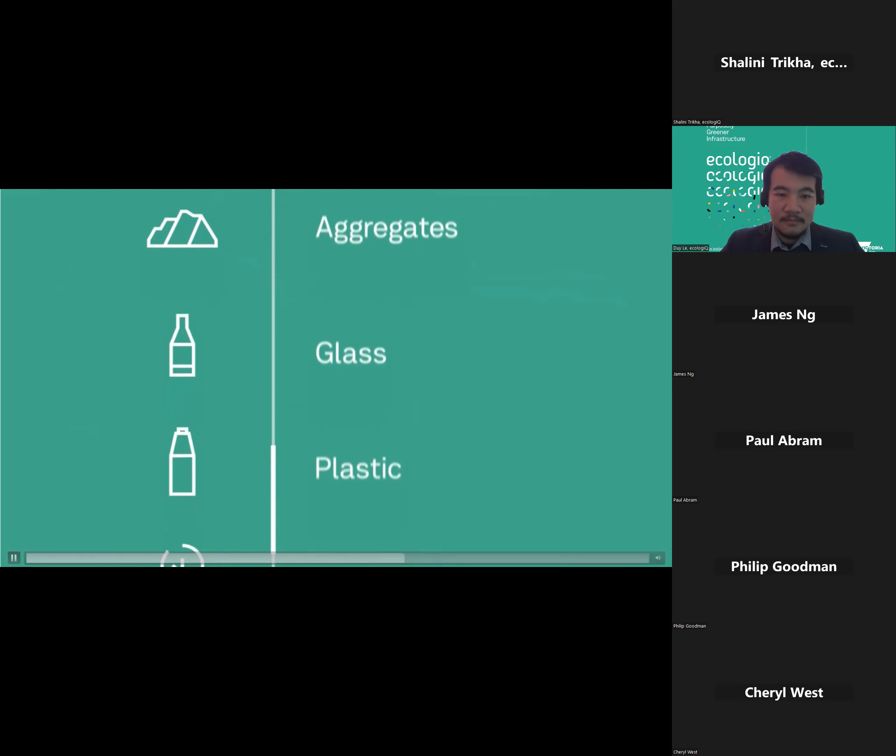The Recycled First policy. Recycled First will require transport infrastructure projects to optimise the use of Victorian recycled and reused materials. This will see the use of recycled aggregates, glass, plastic, timber, steel, ballast, crushed brick, crumb rubber and reclaimed asphalt pavement take precedence over virgin materials.

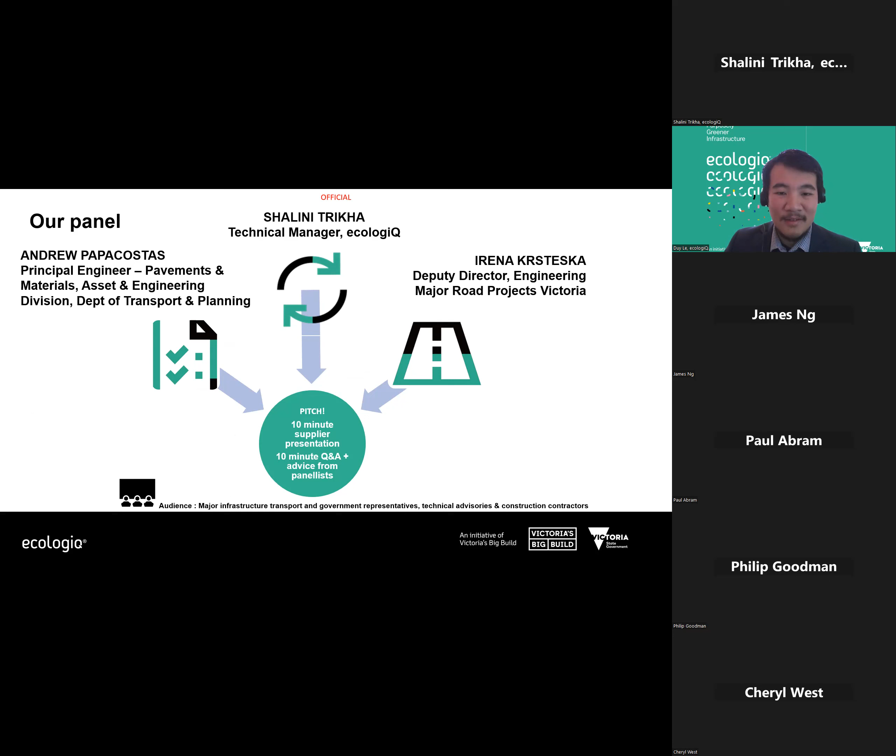Perhaps I'll kick off with Andrew Papacostas, Department of Transport Planning. Andrew: Thanks, Di. Good morning, everyone. So I'm Andrew Papacostas, Principal Engineer, Pavements and Materials. One of those areas that I deal with is specification and standards, and that also takes in new materials, innovative materials, and therefore also takes in recycled materials. Thanks, Di.

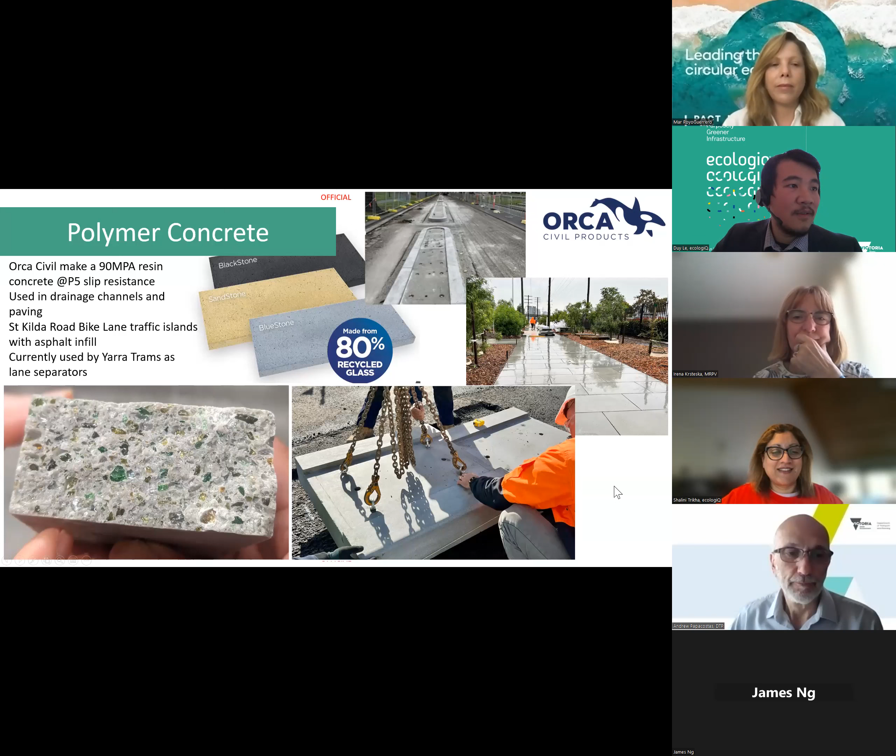Now, just to fly through some of the people who've gone before in the showcase event - we've been running these for about 2 years. Here in Victoria, we've got businesses like Orca Civil that make a wonderful material, a polymer concrete made with recycled glass and calcium carbonate. It's been used by Yarra Trams in the city of Melbourne for a number of years, and you'll be seeing it on the St Kilda Road project. Great local innovation - it can look like bluestone or other materials if you need it to.

So if you're looking for paving or alternatives to concrete, there's one to consider. There's businesses like Omnigrip that use coloured glass and other materials to provide safety treatments for surfacing and asphalt. You can see them used on bus lanes. But thinking creatively, for any architects and designers out there, you can leverage this material to activate public spaces. And yes, it does meet the DTP specs under Section 431.

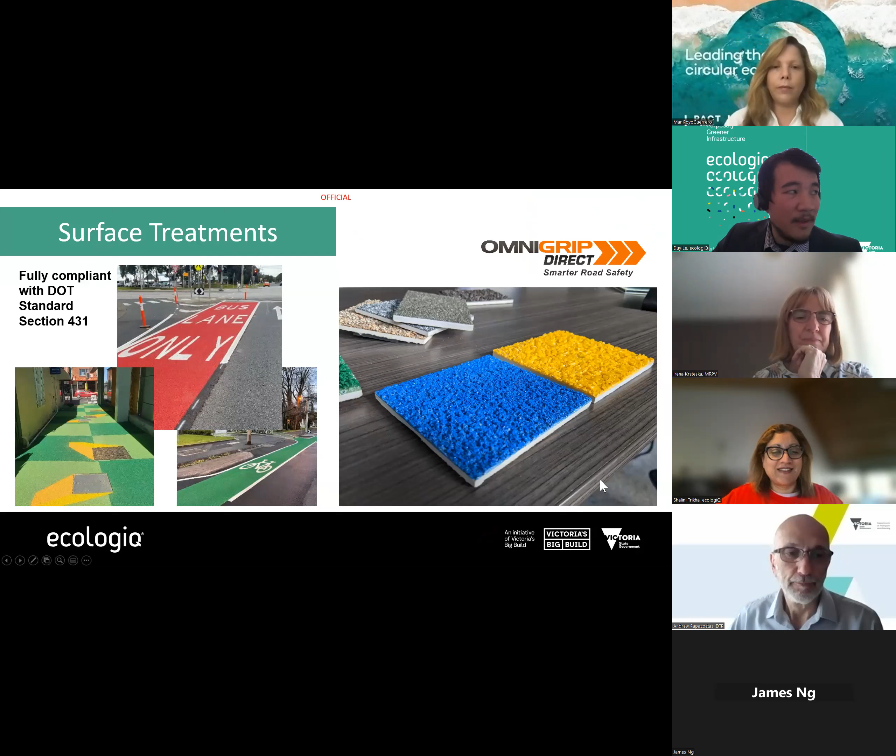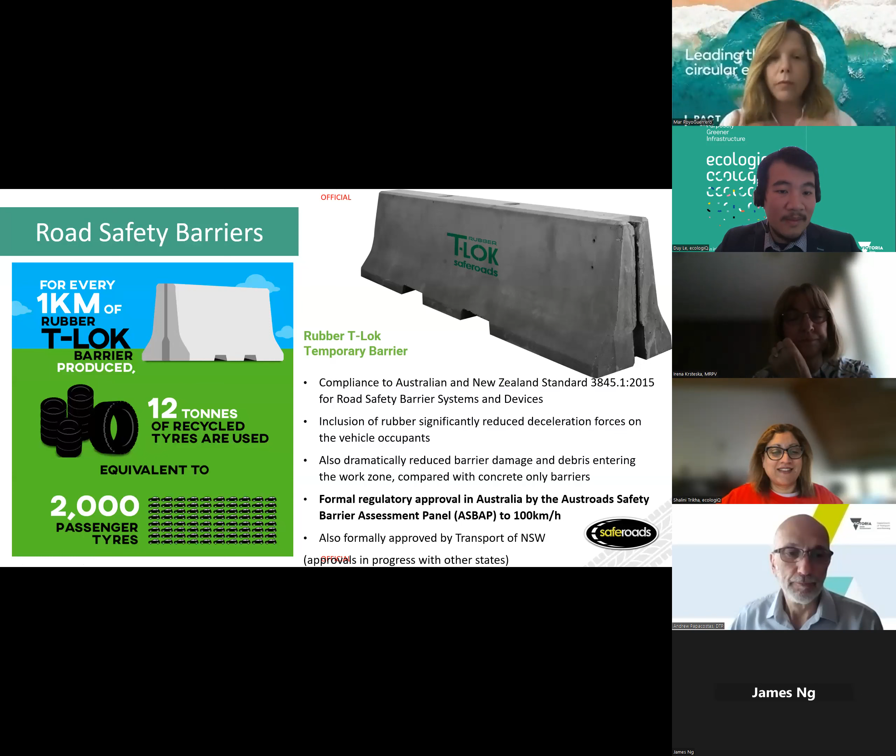More recently, we have Saferoads, which has developed Australia's first T-Lok safety barrier for high-speed safety barricades. These have 4% crumb rubber added, which actually improves the safety performance of the barricades. These are now approved by not just New South Wales, but by DTP VicRoads as well. So this is one that's available to market that's come through recently.

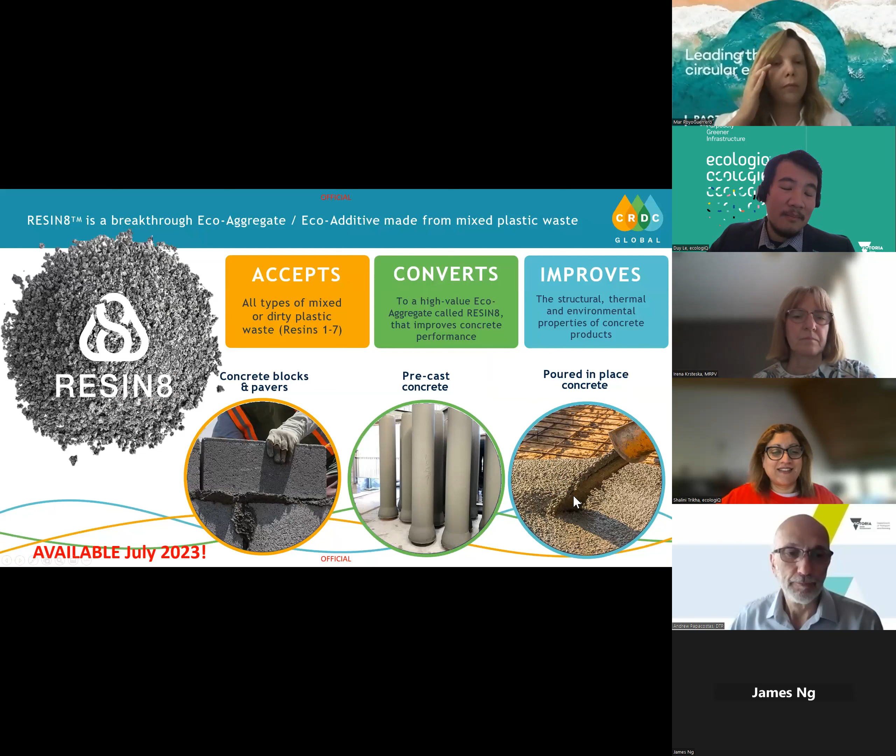And we have businesses like CRDC that, in light of the recent soft plastics issue, have set up collection loops and a processing centre in West Melbourne to take soft plastics and convert them into a plastic aggregate they call RESIN8, which can be used in construction.

Businesses like Casafico, which work more in the built environment, take polystyrene, glass, and other wastes and convert them into building blocks, leveling coats, and brick and mortar material. It's been used in quite a number of high-profile retail and sports stadiums.

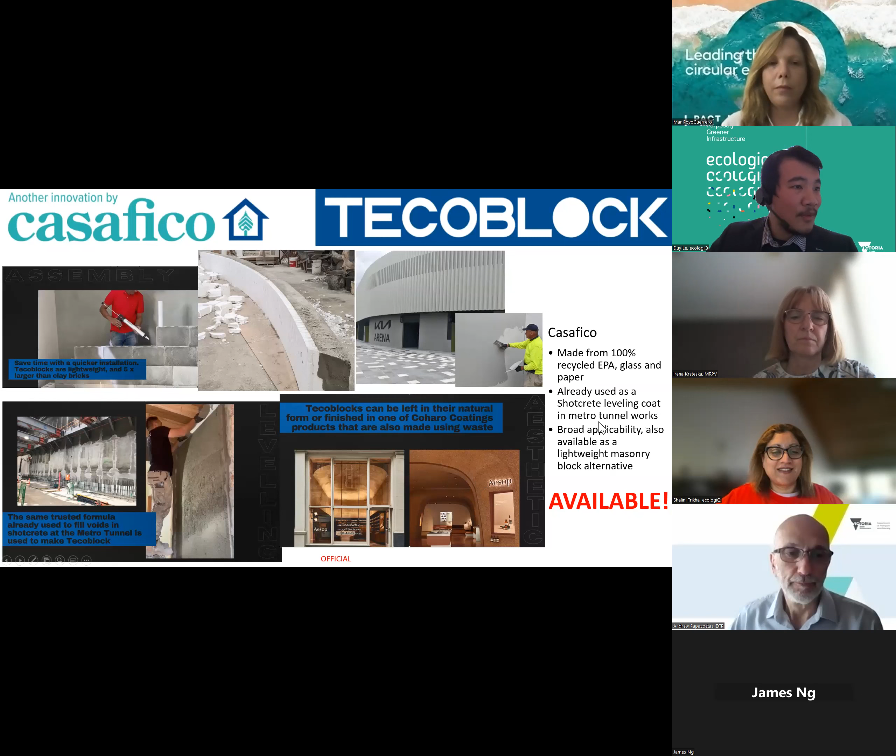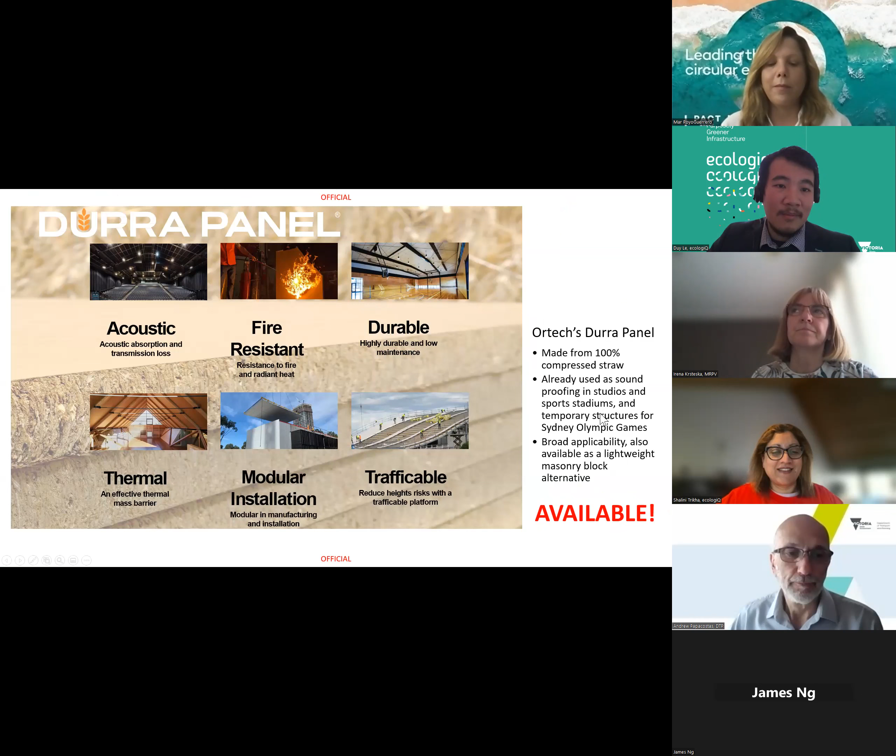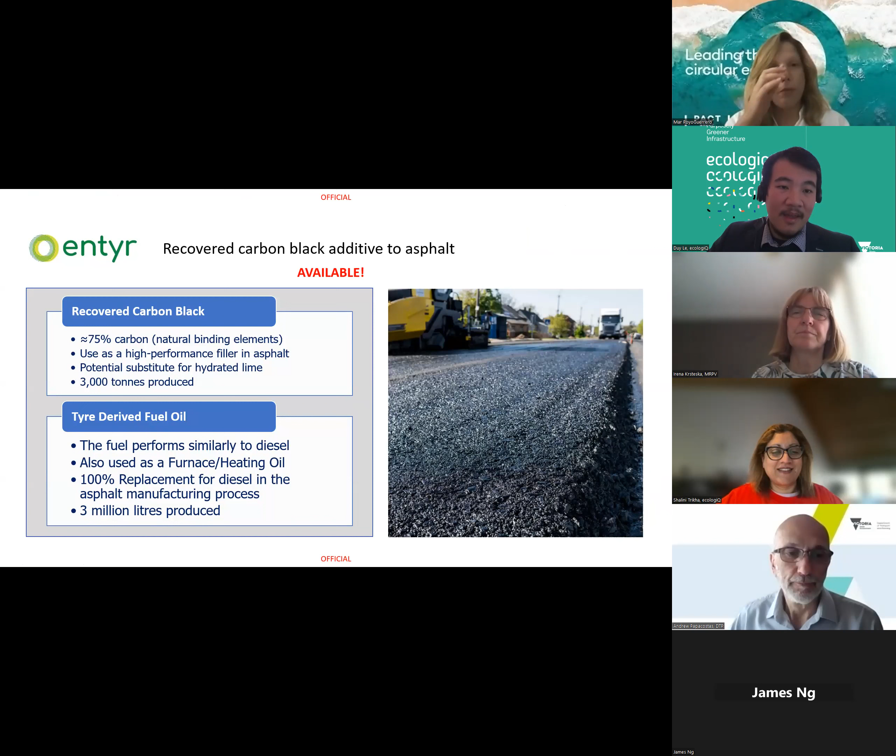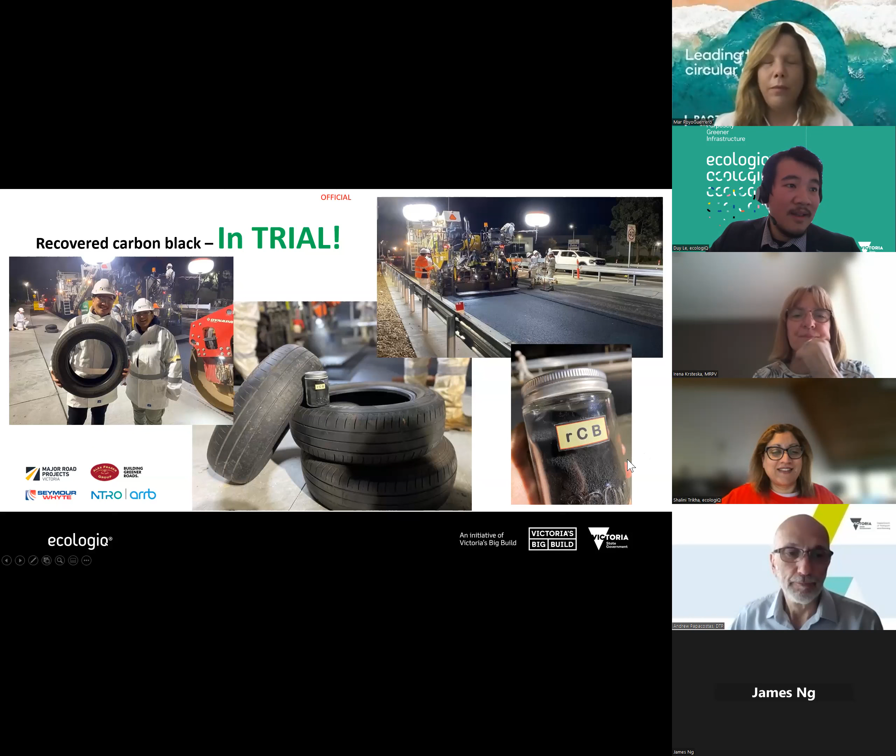More recently, we had a business that takes recovered carbon black from end-of-life passenger tires as a fill material in asphalt, and they pitched at the showcase last November. Earlier in April, myself and the team, through collaboration with everyone here at MRPV, our industry partners and DTP, were really happy to see that go into the ground as part of a demonstration trial, and we'll be tracking the performance of that. So again, the idea behind this showcase is to see more examples like this.

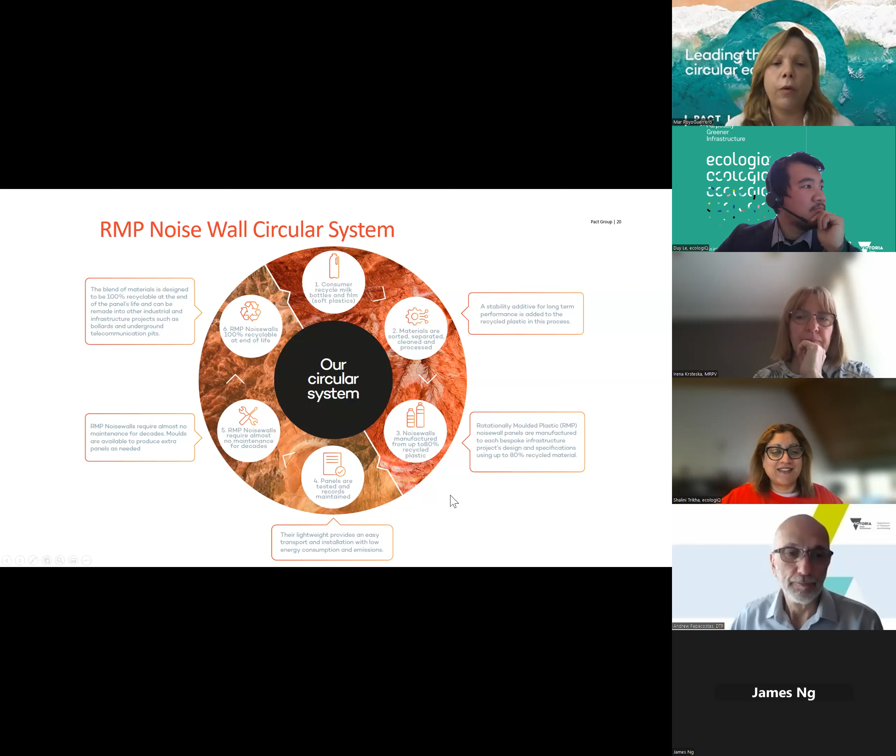The reason we're trying to be consistent in that area is we're trying to make a product that will not only have one more life cycle, but even if it gets damaged by an accident or after decades and needs to be replaced, it can be reground and turned into other products like underground pits and other products we manufacture. Being plastic, we can talk about a lot of different design possibilities.

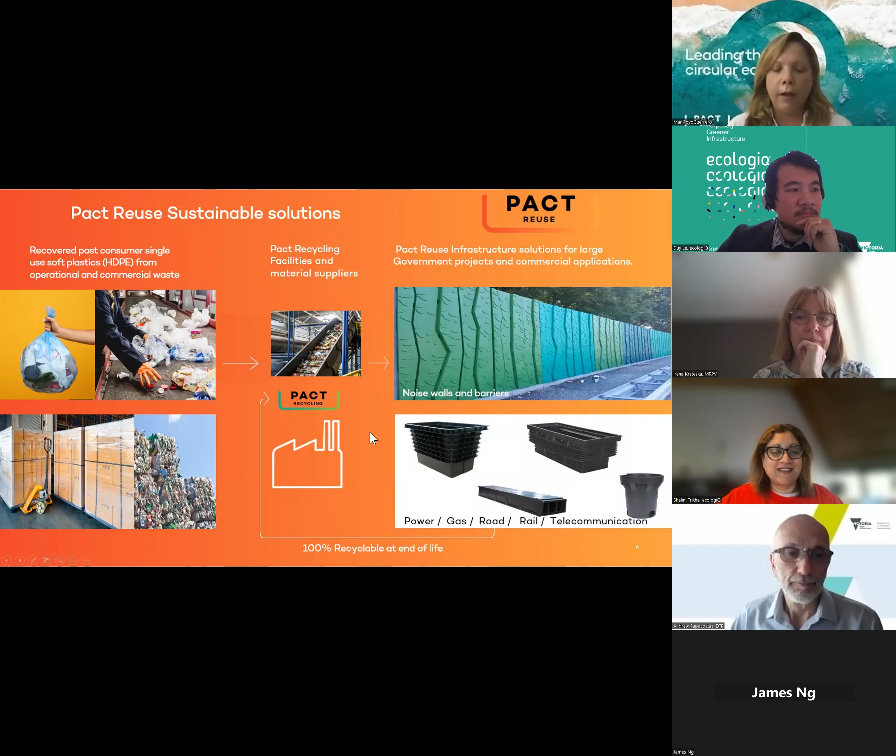If we can move forward, Duy. So this is what I was trying to explain earlier. On the left you'd see things like soft plastics, stretch wrap that we use widely in industry. For example, our returnable crate service, DPS - a lot of these products with food grade contact regulations require stretch wrap. It's very present and really hard to recycle, so we were really satisfied to be able to incorporate it in our blend. The end result is what you see on the right side - your noise panels, to different degrees of post-consumer and post-industrial material. We also make other products like gas, electricity, telecommunication underground pits.

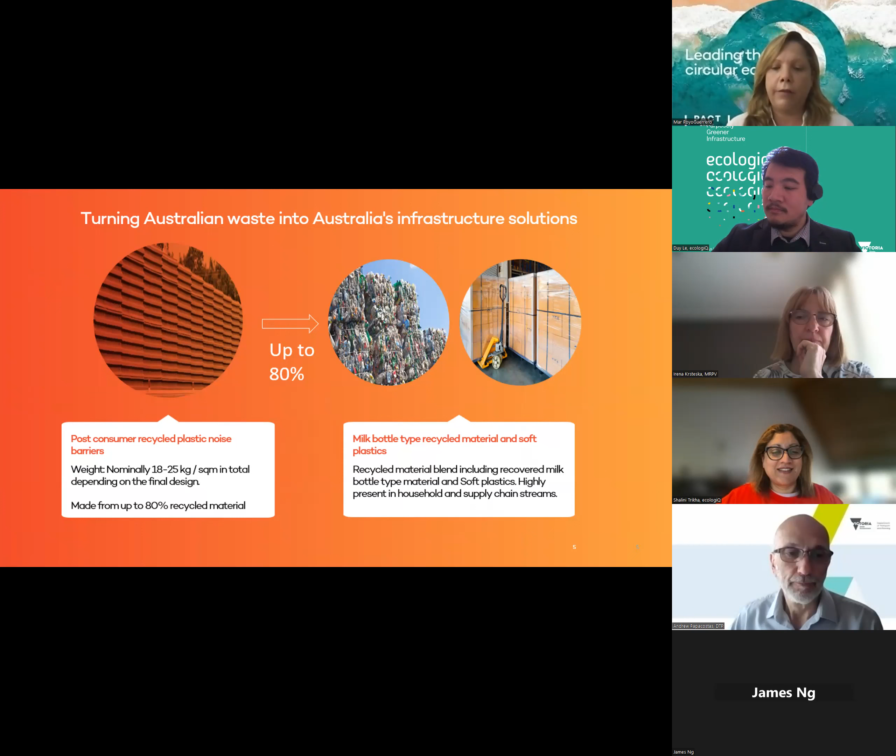Can we move forward. Our best known, as I said, is the Mordialloc Freeway project. This is a very lightweight product, about 18 to 25 kilos per square meter, which makes it really easy to handle and transport, very quick to install, very safe, and also very durable.

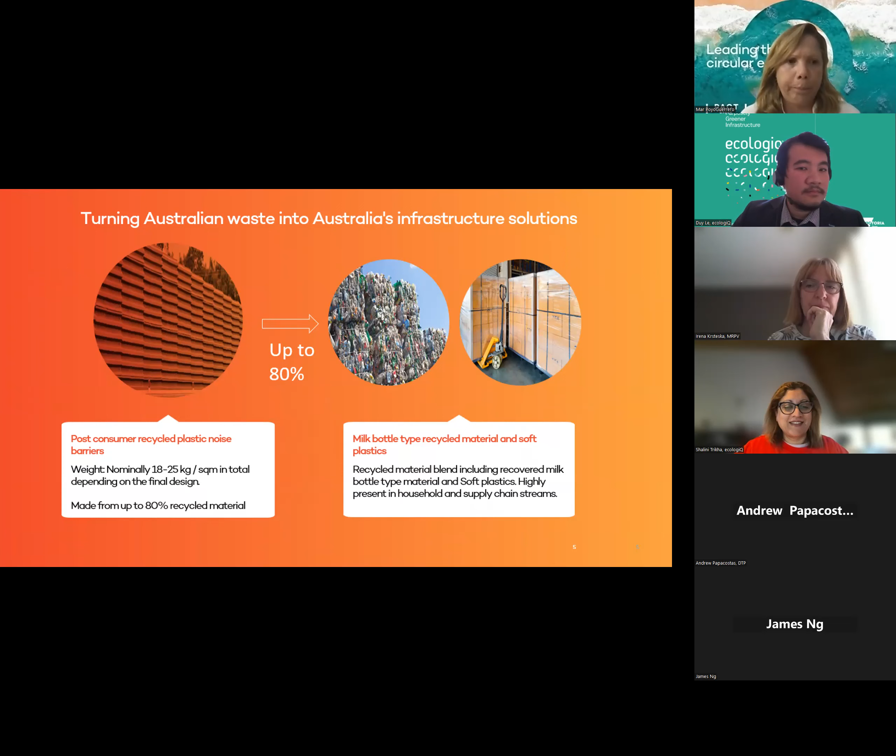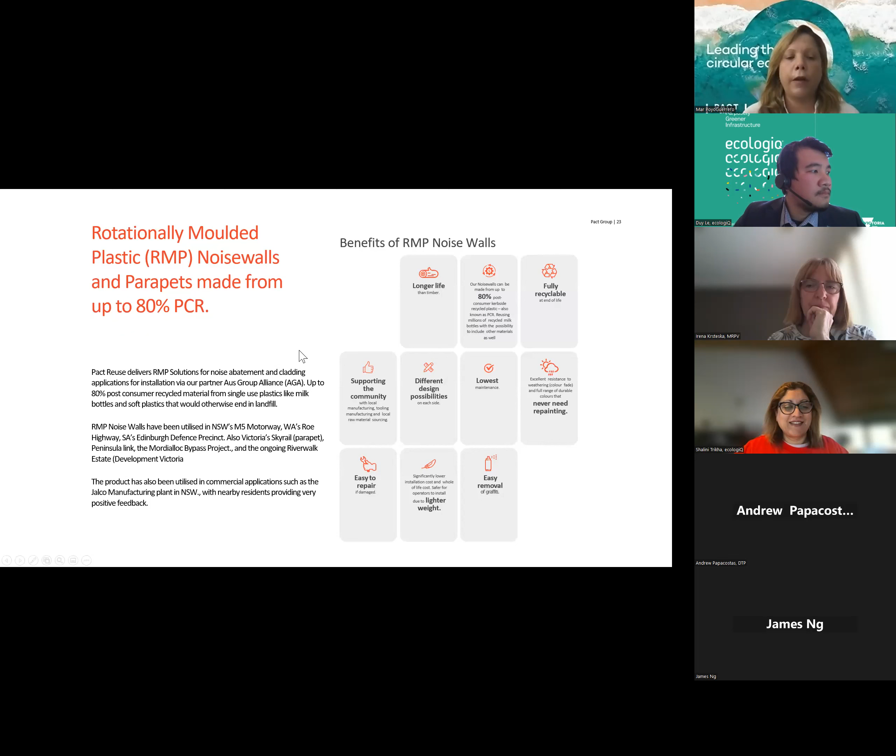We are moving forward in this space, as this is a product with great possibilities, so we can expand the design intent, even the application.

Many projects you'll see, in this case, both designs at the top are the same panel, front and back, so the panels can have a different design on both ends. As you can see at the bottom, we can cover fixings and show them to different authorities, since different project managers want different things. Some people want a smooth design, some people want to inspect the panels and their fixings. We can also imitate other products. That one at the bottom right, I actually didn't know it wasn't concrete until I started working for Pact. That's just color matching and laser printing to reproduce a panel made in concrete that was already in that area, and we just replaced the section with our product.

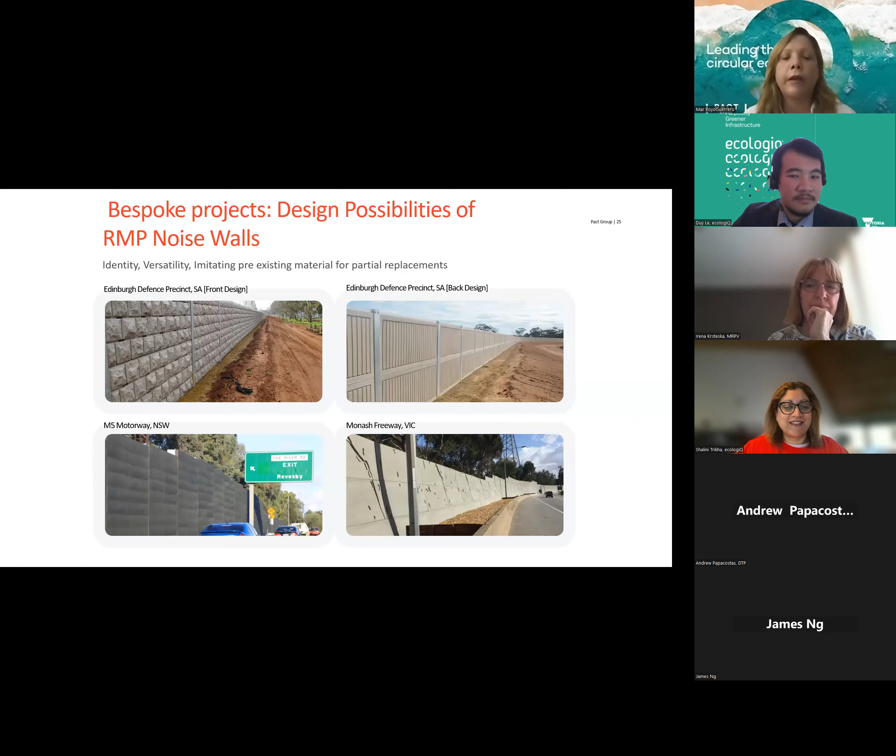A little bit further, these are examples of design possibilities. The advantage of working with molds and plastic, since this is a rotationally molded product, is that we can be very versatile and very open to design intents, imitating products.

We are working in different spaces, so we can see this product being applied to different industries and applications. We used this product in a manufacturing site belonging to the Pact Group's packaging division, which was getting complaints from neighbors because they started operating after hours. So we provided them with the product, set around the factory, and got very good feedback from the factory itself and from neighbors who appreciated that we were using a recycled product.

We want to see this product also in the likes of commercial, real estate, and other industrial applications. Actually, the Riverwalk project I just mentioned earlier is a real estate project, a housing project for Development Victoria.

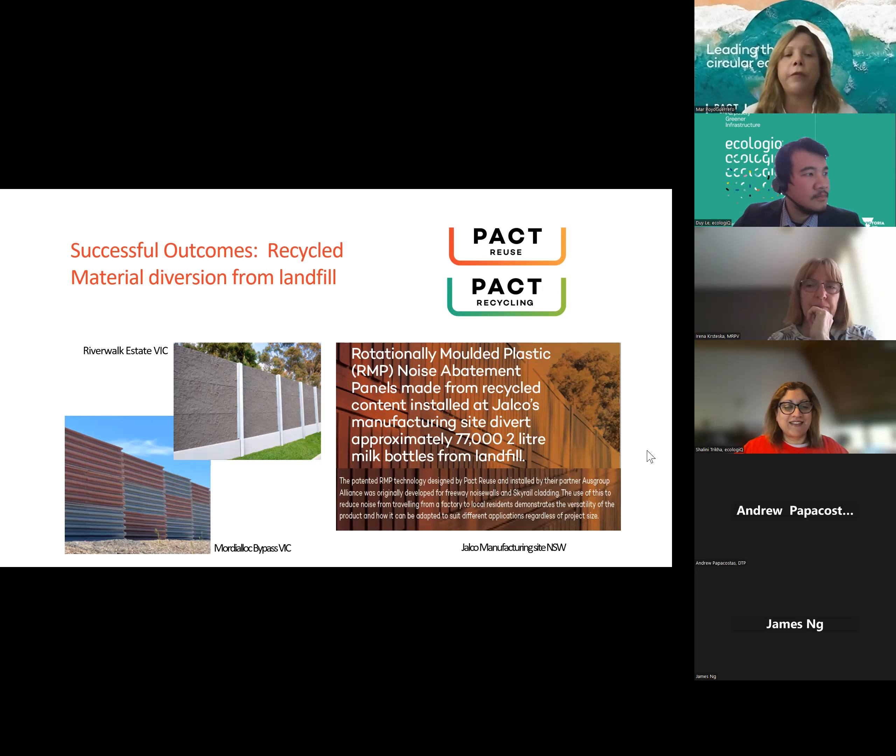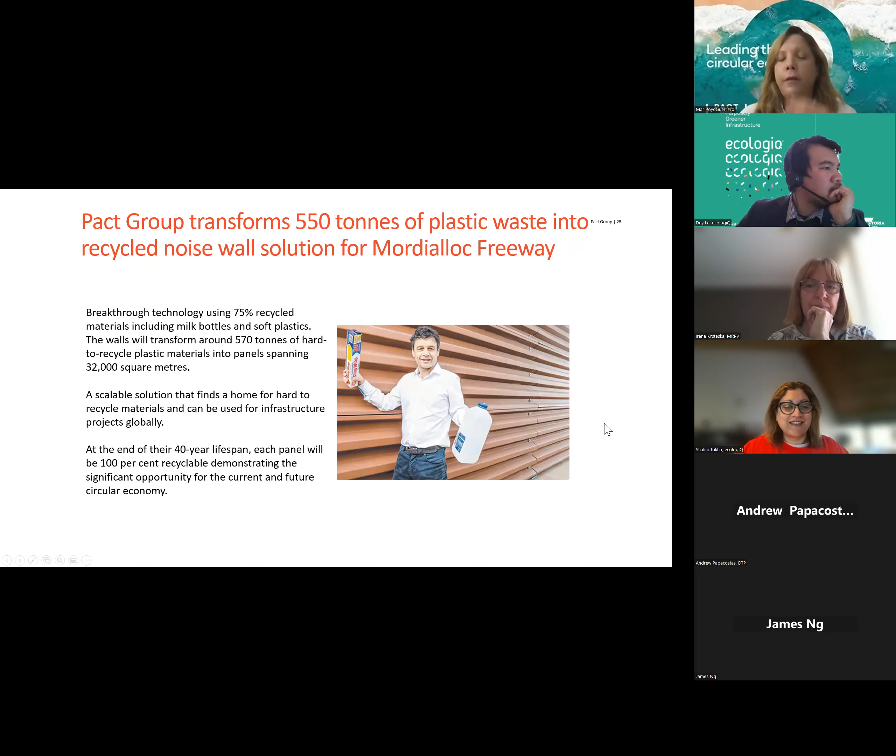This is, again, the Mordialloc project where we use up to 75% recycled material. We can do up to 80%, but in this particular design, due to adapting to the architect's intent who had already designed panels in Corten steel, we had to make them a little bit heavier for the specification. So it was around 570 tons of plastic that would have ended up in landfill, coming directly from curbside recovery—stretch wrap, as an example, the milk bottle grade—that was processed and repurposed, and it's part of the noise walls right now.

We are working with our design team on different applications that we can expand to in the future. For example, we noticed that there are projects that don't have noise walls, but everybody needs visual protection during a construction phase, like gawk screens, or even noise abating gawk screens that can sit on a jersey barrier, concrete or steel. We're working also on standalone noise barriers for crowd control. Everything we are developing would have the same formulation with up to 80% post-consumer recycled curbside recovery material.

This is not a new product by any stretch of the word. The formulation is quite recent—before we were doing 30%—but we've been manufacturing these noise walls for over 15 years and they are still standing as the first day. They are really reliable and a really good solution for a circular economy, being 100% recyclable at end of life.

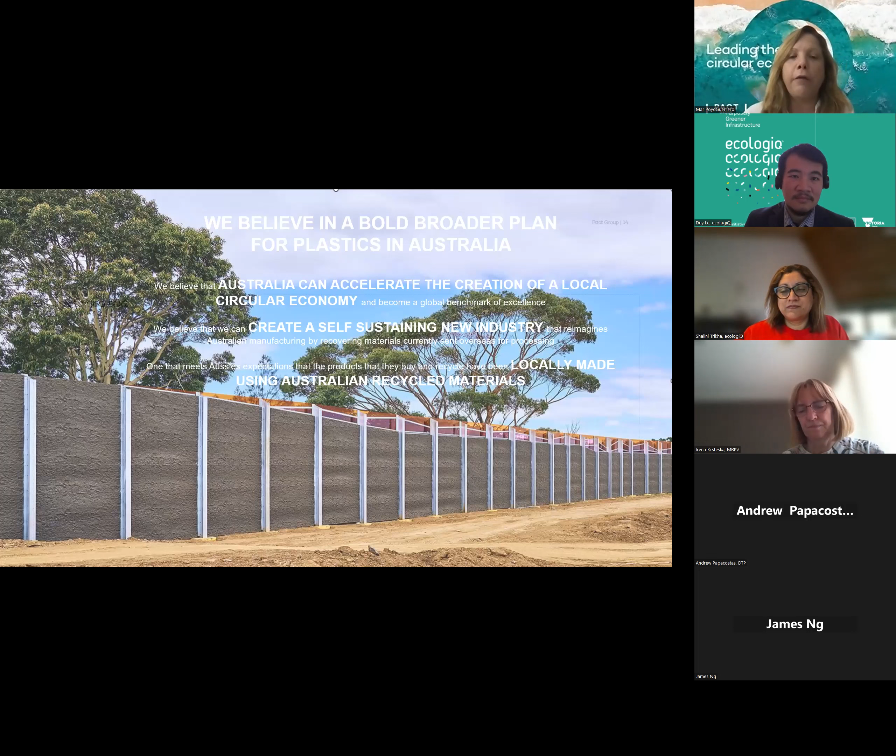We just want to see the specifications on the ground, obviously, because some people are saying we won't be moving forward until we have finalized, published specs to refer to and all that.

Well, stop comparing to concrete.

Thanks, Mar. Great presentation, and of course it's very important to mention the Mordialloc Freeway project success in implementing the noise walls. What I wanted to ask you is a couple of things. Obviously the durability and lifespan of the panels, as well as how can we be sure discoloration is not going to be an issue with this type of product. Maybe you can tell us how that performs on your product. And the second thing is, what sort of challenges did you find implementing the product on the Mordialloc Freeway that you've learned from and now improved?

Sure. Look, first on the durability and the color fastness you were asking about: the product is a rotationally molded product. The way that works is a powder plastic goes into a mold that rotates and goes into an oven, coating the mold, and then you open it and have a hollow product, which is the panel. It's the same way we manufacture water tanks, for example. So the color is in the powder. This product is not painted at all. So if you cut it or scratch it, you'll see the same color at the back and inside.

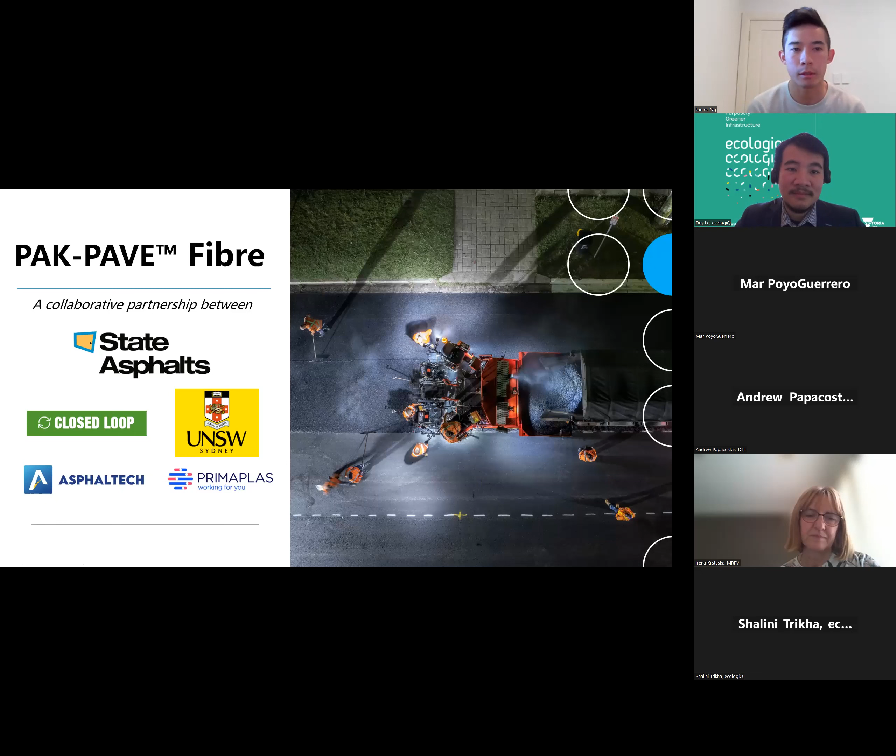I'm a project manager at State Asphalts New South Wales, and I've been looking after our sustainability projects for the past few years. Brendan and I actually presented here a couple of years ago at one of the first ecologiQ showcases, and we've come some way since then. Today I wanted to talk about our collaborative partnership to develop construction materials from waste, but more specifically about a product we brought to market called PAK-PAVE Fibre.

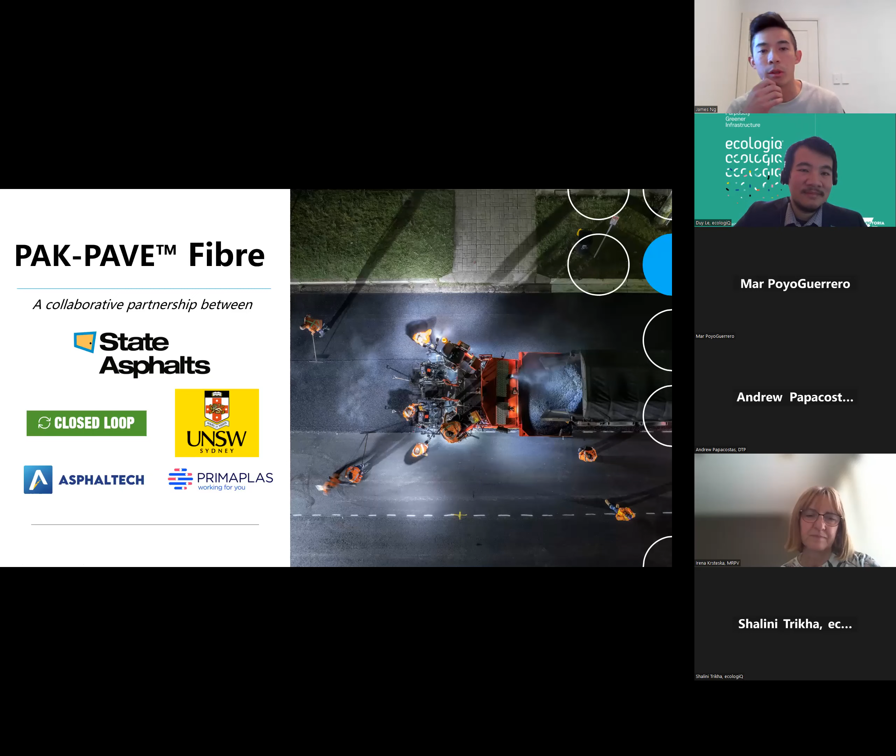So the agenda today: give a bit of background about who we are, the problems we're trying to solve. I'll do a walkthrough of the product and then where we're heading.

State Asphalts New South Wales, we're a family medium-sized business based in Sydney. We got into the construction space about 50 years ago, working on projects like the Hume Highway and Sydney Airport, and about 20 years ago we got into asphalt production and laying. We now supply asphalt throughout metropolitan Sydney and Greater New South Wales.

In 2020, we built a partnership between 4 private companies and a university: ourselves, Closed Loop Environmental Solutions, Asphaltech, Primaplas, and the University of New South Wales. We set out to solve some pretty ambitious but particularly challenging problems in the waste and recycling space, which is composites and mixtures.

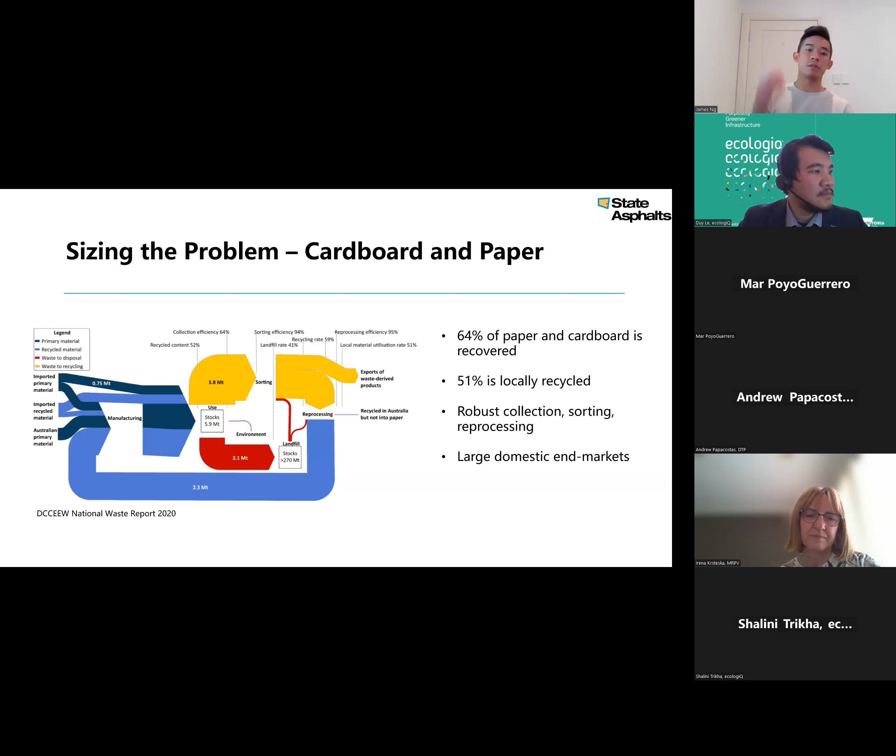So I first wanted to size the problem and give you some statistics about paper and cardboard recycling. This market's already really quite circular - there's really good collection, really good robust sorting infrastructure, high recycling rate, healthy end markets. But the devil really is in the detail, and the key word here is average, which doesn't really tell the whole story.

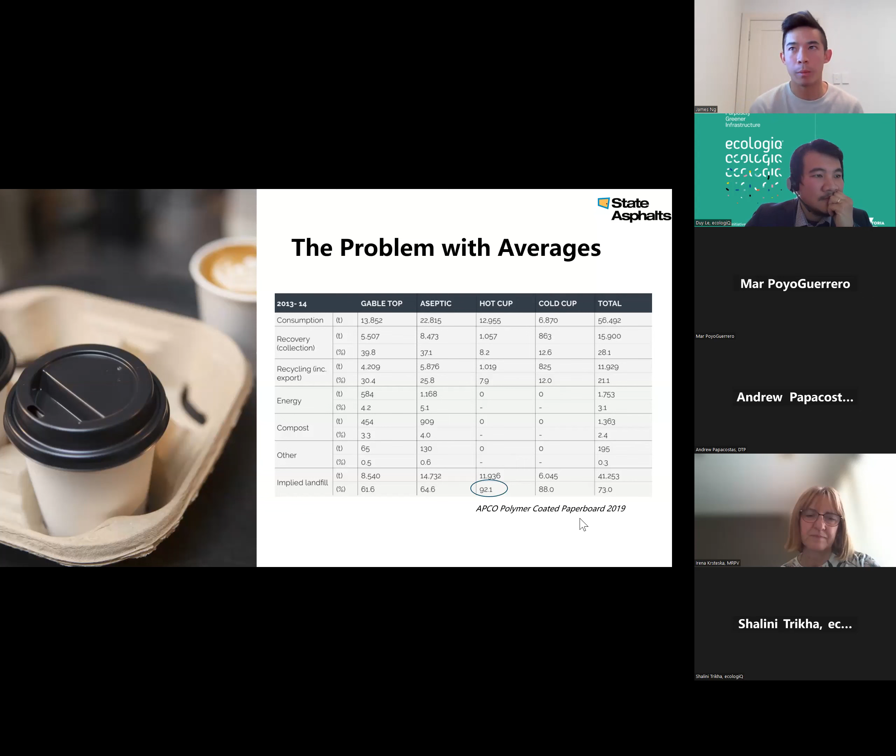So what is PAK-PAVE? It's our initiative to make dents - it's our ambition to materially increase the recycling rates in these problematic waste streams.

We're very much a first-principles approach kind of company. We want to solve these hard problems first. So in the case of PAK-PAVE fiber, it's reverse engineering liquid paperboard coffee cups, knowing that it's a cellulose fiber and a film-grade LDPE.

Some facts: we know that we use cellulose fibers in stone mastic asphalt, or SMA. We know that paper is cellulose, and we know that our plastomeric PMBs in binders use polyolefins. As a side note, for those who don't know what stone mastic asphalt is, there's an absolutely riveting primer coming up.

So the second part of our approach is collaboration across industries, and we're really just lowly asphalt guys. Before this project, I had no idea what polyolefins were, let alone the difference between a 10 melt flow LD film grade and an LD metallocene that has a 2 melt flow, but our partners do, and I know it makes a difference in our asphalts. Recycling is really an exercise in materials engineering, and we need that collaboration across different subject matter experts and different material types. That's why we're so passionate about partnership.

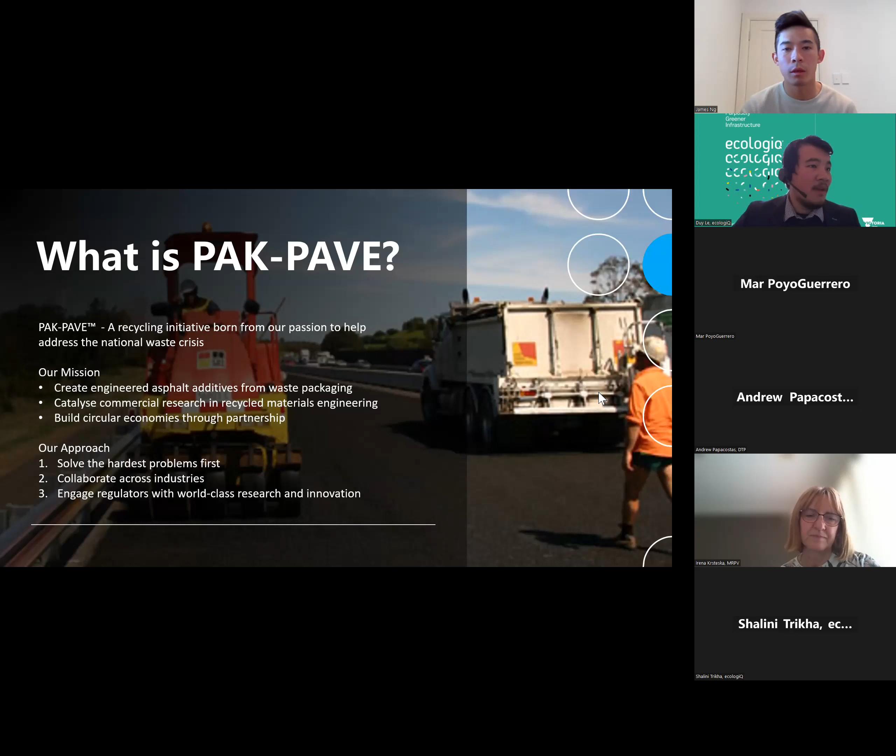James, just letting you know about 5 minutes left to present, so I'll... Okay, we'll just sprint through. Brennan was like, actually, I should really talk about the product at some point. So why don't we sprint through to that.

So when we get to PAK-PAVE fiber now, we actually built a quality assurance system for sorting and collecting coffee cups. We have a closed loop that now has 1,500 collection points nationwide, and they now have an Australasian recycling label as a qualified recycling system.

We have a partnership that covers end-to-end from coffee cup collection through to finished asphalt pavement. These fibers are being produced locally, and they're commercially competitive with existing fibers. Next slide, please.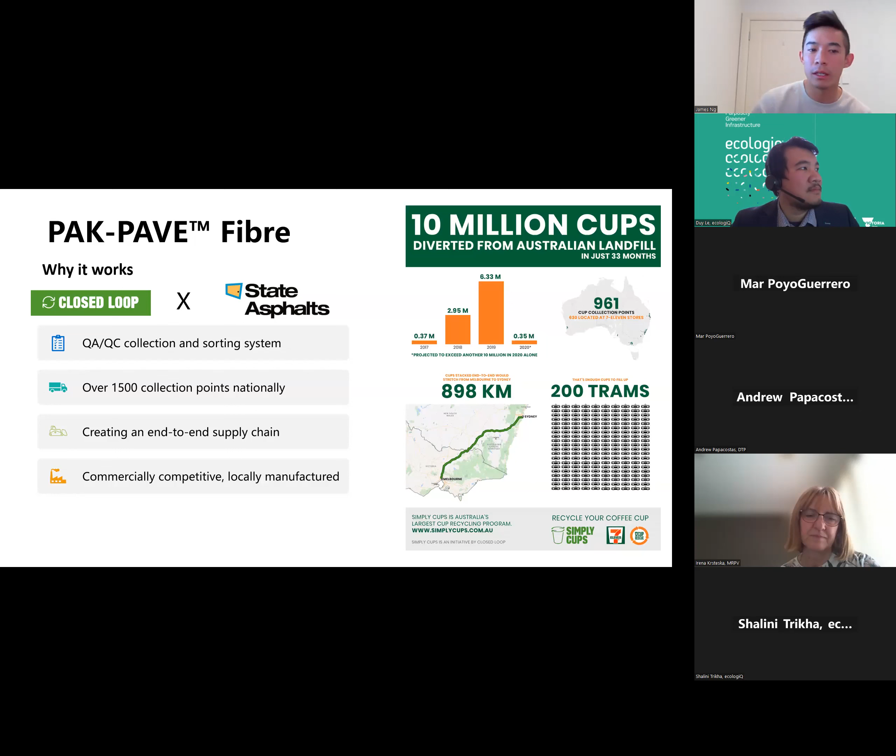Really, sustainability for us is about making sure that we don't jeopardize the circularity of existing asphalt. We're trying to balance three things here: recycled content, carbon intensity, and durability. By promoting something like SMA, we get the chance to use novel beneficial additives like fibers from local waste.

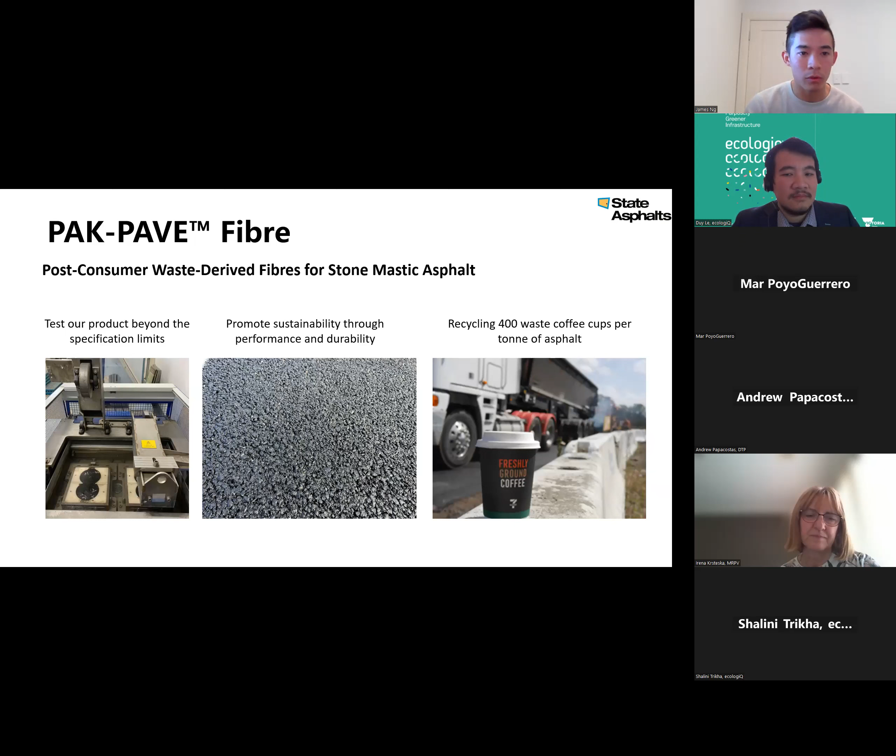Our PAK-PAVE fiber is 100% recycled. At a usage level, it's about 400 cups per ton. It doesn't seem like a lot, but when you stack it up in aggregate demand, liquid paperboard looks like a pretty good supply.

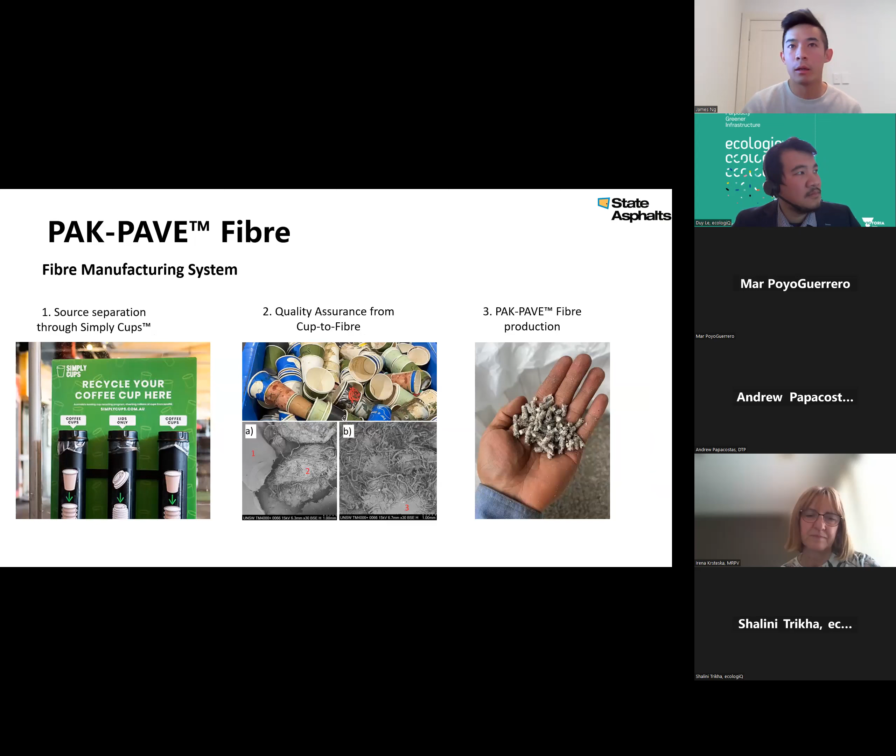In terms of how we manufacture it, we want to ensure that we're not changing any of the traditional models of manufacturing. Asphalt manufacturing is quite an efficient process already. A modern plant is exceptionally efficient, and we don't want to have to build new ad lines or new novel technologies just to introduce a new material.

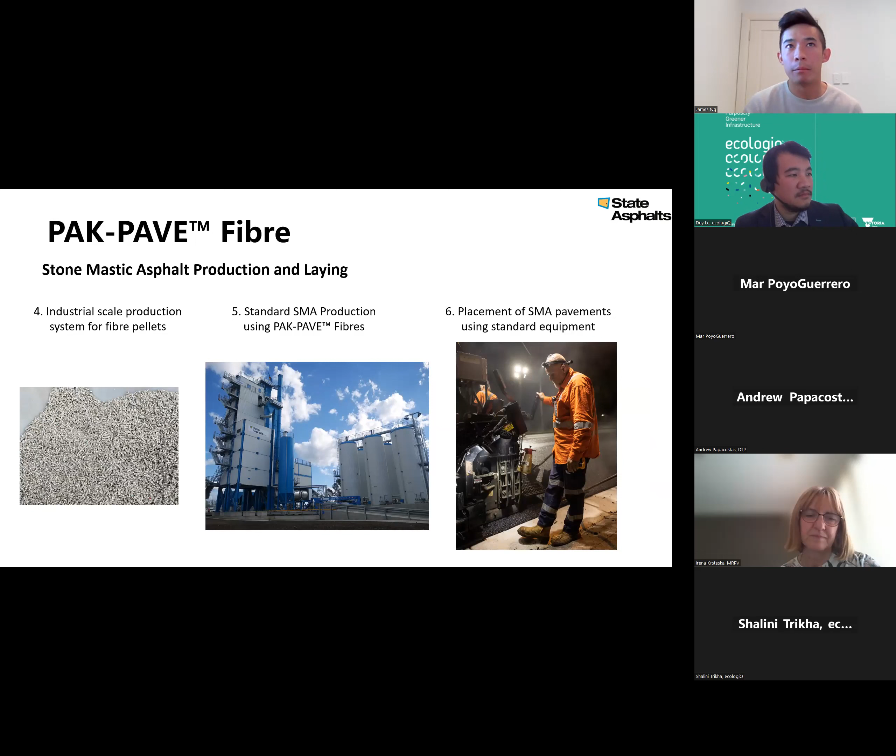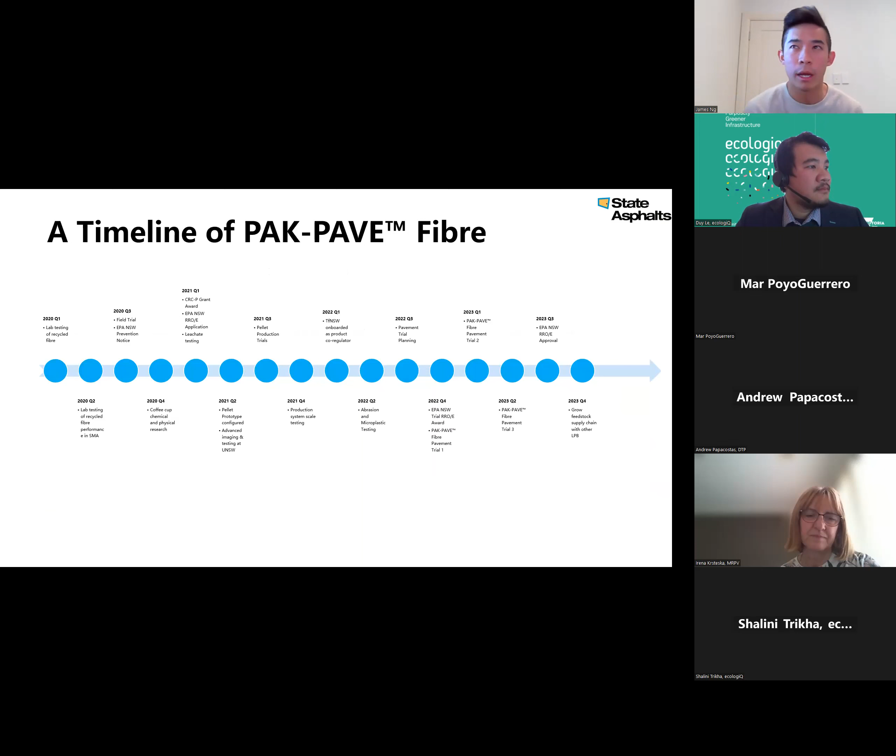Next slide, please, Dylan. So where are we today? We've laid about 400 tons of SMA—or actually, the next one was probably better. Thanks.

We've laid about 400 tons of SMA using PAK-PAVE fibers, so a bit over 150,000 coffee cups that have been recycled already. Both Transport for New South Wales and EPA have been co-regulators overseeing the approval of our product. To my knowledge, they're about the most stringent in the country.

We have a commercial scale production facility, and we're looking at demonstrating on an IS Council rated project later this year. The pavement trials have gone really well—we've trialed a really aggressive thickness reduction using SMA because of its increased performance, going with a 30 mil SMA10 compared to a 50 mil spec AC14, and it's holding up really well.

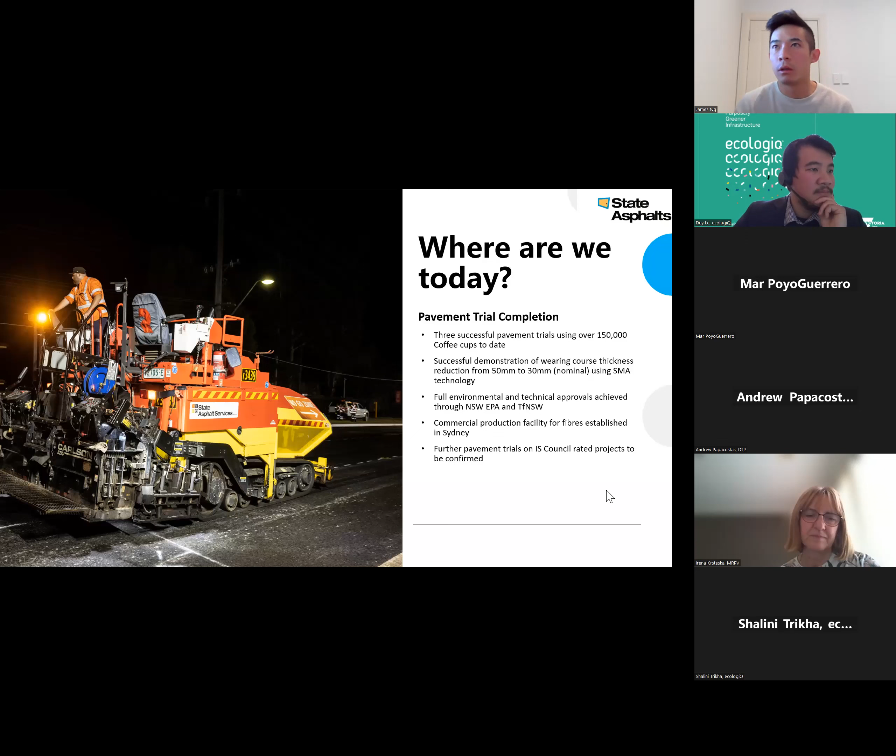Next slide, please. So the next frontier for us is, as I mentioned, hard problems first. It's three things: expanding our collection of hot cups through the Simply Cups network; secondly, looking at additional liquid paperboard streams like aseptic containers and gable tops—that's long life milk and milk cartons respectively; and thirdly, replicating those production lines across our partner network. Our goal is to keep it local and modular.

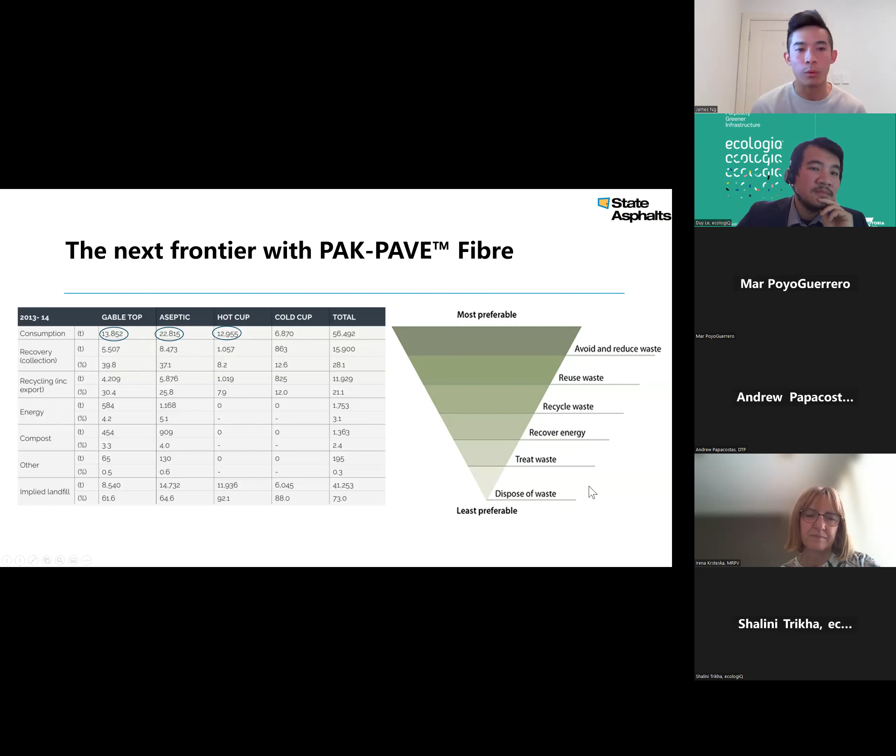If you take an interesting consideration: if you transport 1 ton of material from Sydney to Melbourne, that's about the same carbon intensity as making a ton of asphalt, which means drying and heating aggregates and bitumen to 170 degrees. So keeping it local is something we're really trying to accelerate.

I want to preface this—I wanted to talk about PAK-PAVE fibers today because I'm here with my partner, Brendan Lee from Closed Loop. We were co-presenters last time, but we've actually been looking at a whole bunch of other materials as well beyond PAK-PAVE fiber. I think PAK-PAVE fiber is going to be our first of many. We're basically trying to look at Australia's national waste priorities: glass, paper, plastic, and tires. On that note, I'll turn over to Q&A.

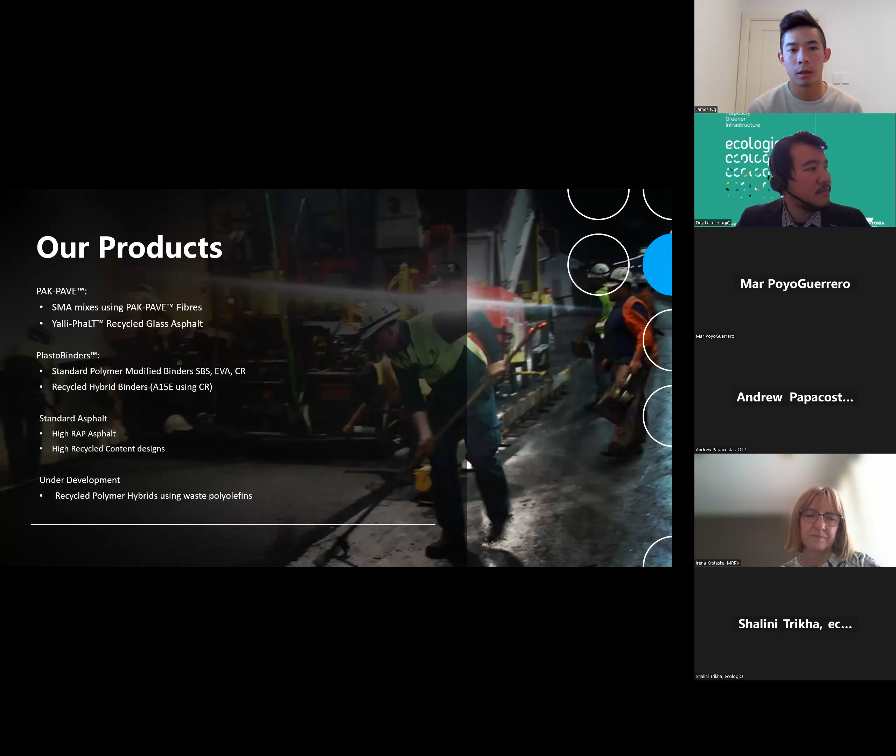It's great to see that you're trying everything to use local products and utilize especially the coffee cups, because we're very fond of those in Australia.

My question is really to understand what you see as barriers for the industry to utilize this product, or do you see this as business as usual now? What can we help you with in terms of major infrastructure projects to promote this product?

I think there are two parts to that. At a technical level, it's about increasing our technical expertise across different procurers. Going to something like stone mastic asphalt is quite a technical endeavor, so it's about understanding the benefits and properties and doing that whole-of-life assessment.

If I use something that's slightly more carbon intensive, the trade-off is that I use way less of it and it lasts longer. So there's a huge amount of promotion of sustainability through durability, which is where our focus has been.

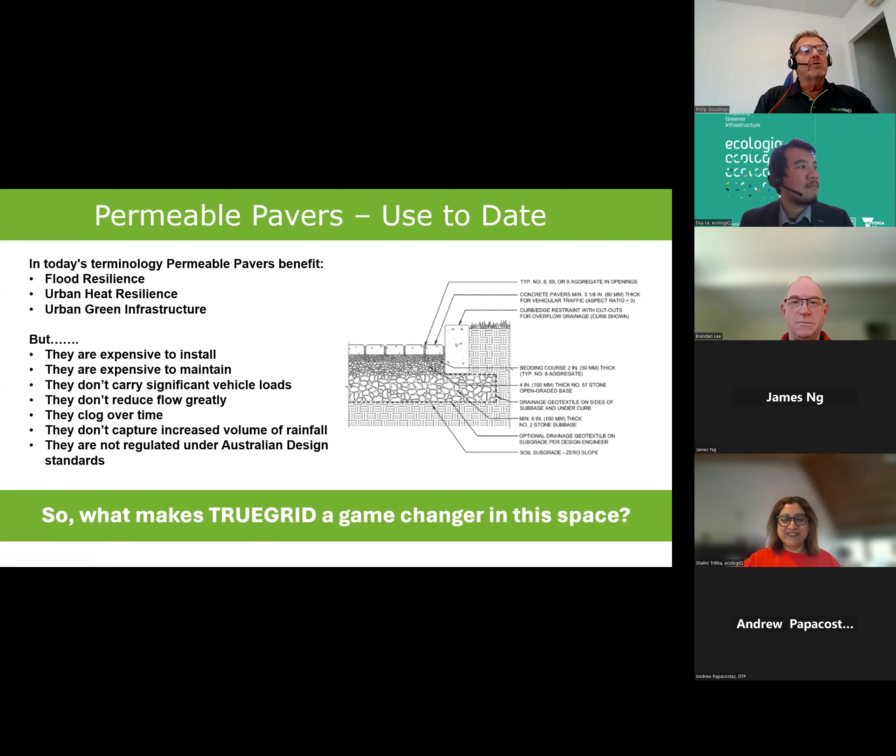Everybody's had an experience with permeable pavers to date. Basically, they are pushed for flood resilience, urban heat resilience, and urban green infrastructure. But of course, they're expensive to install, maintain, they break down, don't carry loads, and they clog over time. So what makes TrueGrid different?

TrueGrid is manufactured from 100% recycled HDPE and is 100% recyclable. It is manufactured from post-industrial single-source water and infrastructure pipes, such as mining pipe and the like, cleaned, granulized, and injection molded into the grid. The grid has a 40+ year lifespan in the ground. UV stabilizers are added, but at end of its life, it can be reground and reused into other aspects as well.

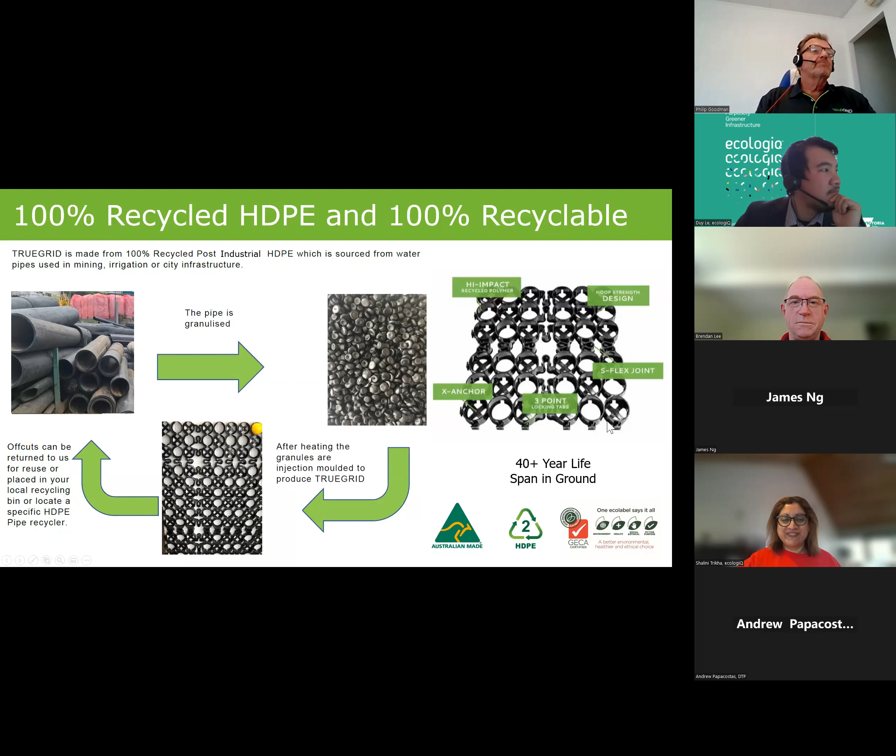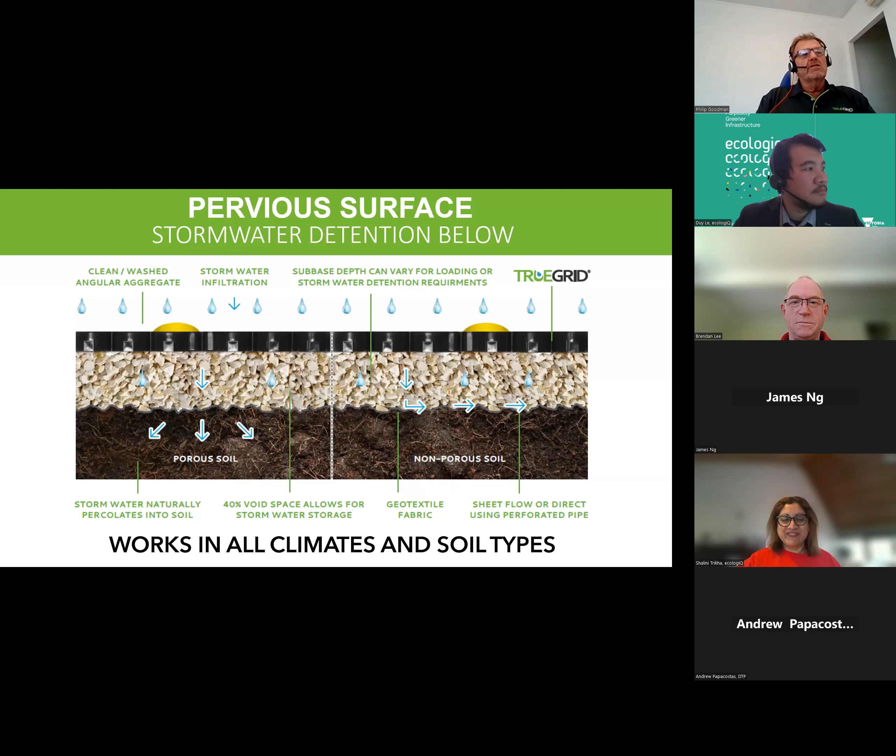It's all about how you take a pervious surface and detain stormwater below. In most instances, the stormwater infiltration from permeable pavers might be 2 or 3%. We are, in essence, 100%. So you're able to detain the volume of water below the grid based on the use of angular gravel, which generally has a 40% void space.

So, water quantity and quality. It's quite easy to work out the detention capacity of TrueGrid. It's based on using a 20 to 25 mil angular gravel, which has a nominal void space of 40% to sit below the grid. So it's quite easy to know how much water you can hold in that base. It has a runoff coefficient of 0 to 0.05. So the aim is to capture all the volume on site and have no flow off site. The water flows below the surface in the angular gravel.

And with water quality, I'm pleased to announce that we've now completed a MUSIC node for treatment with various options based on the type of subgrade that you put below it, which will allow you to treat the stormwater as well as part of your car park or other facility.

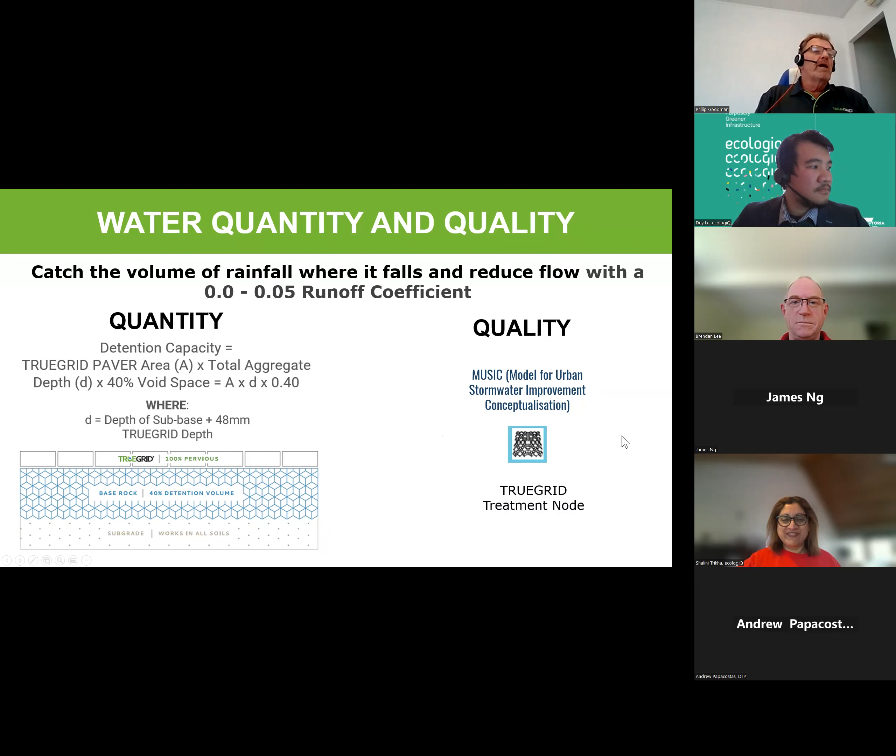So you can have gravel, stone or grass infill, all operating in the same way. I originally brought the process in for grass car parking, where you don't want to crush the roots and you want to have longevity, and it delivers that quite simply.

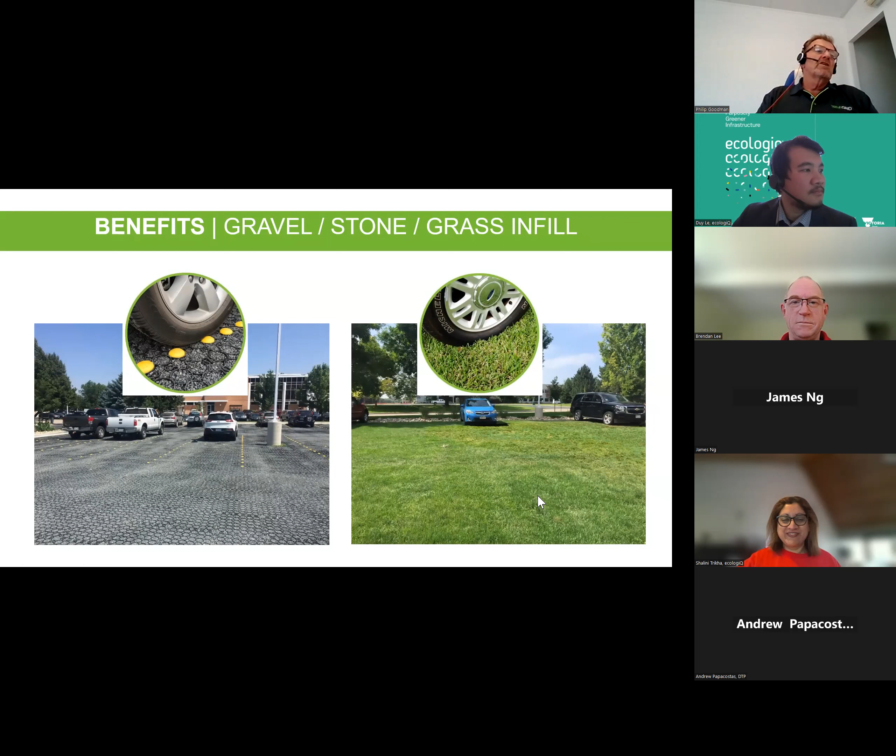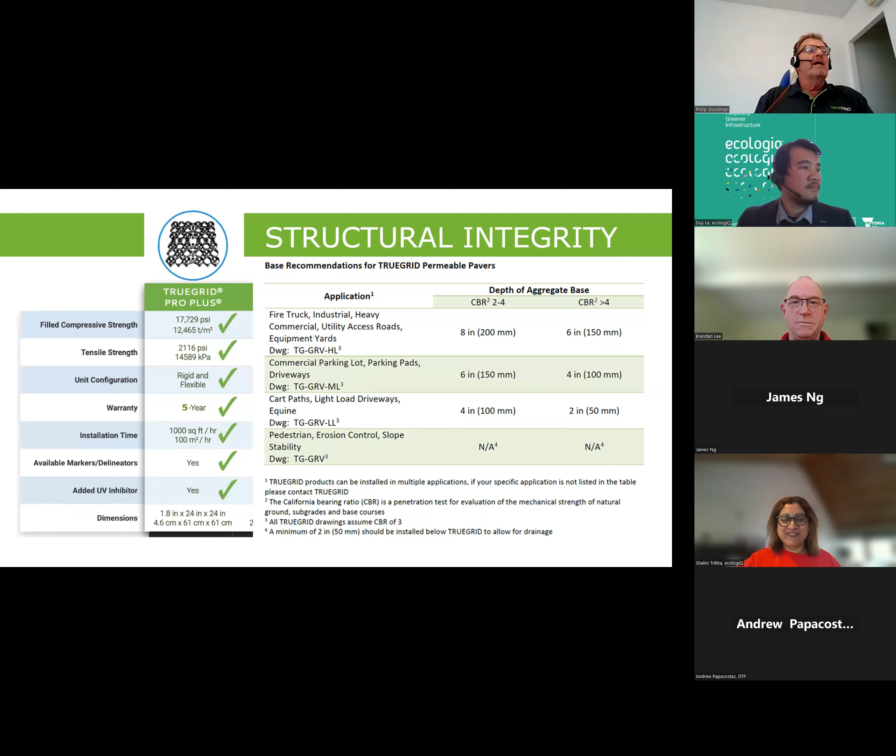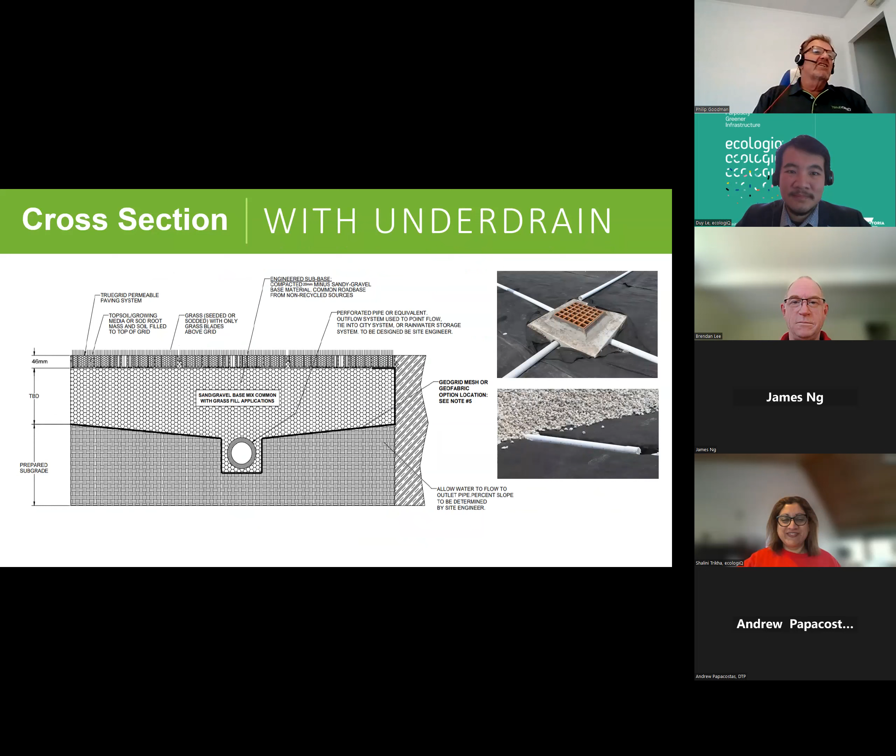Sorry about that. So in the cross section, obviously we're managing the stormwater in this place. Go to the next one, thanks, Stu. I don't know how that happened.

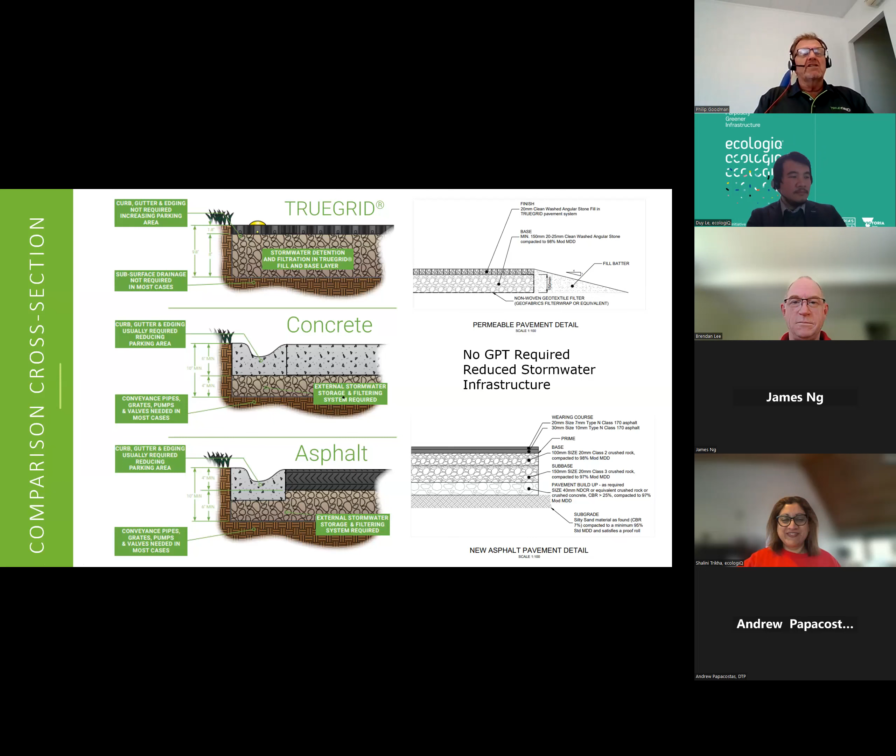In a comparison cross section, you will see the difference between putting TrueGrid, concrete, and asphalt. With TrueGrid, you also don't have the pit and pipe infrastructure, and because you have a zero flow rate, there's no GPT required. The pollutants don't get concentrated in the process. The permeable pavement detail and the asphalt pavement detail on the right-hand side of the screen are for a job in Victoria, where you can see the difference in ease of laying and ease of contracting between the two surfaces, and these surfaces actually abut each other.

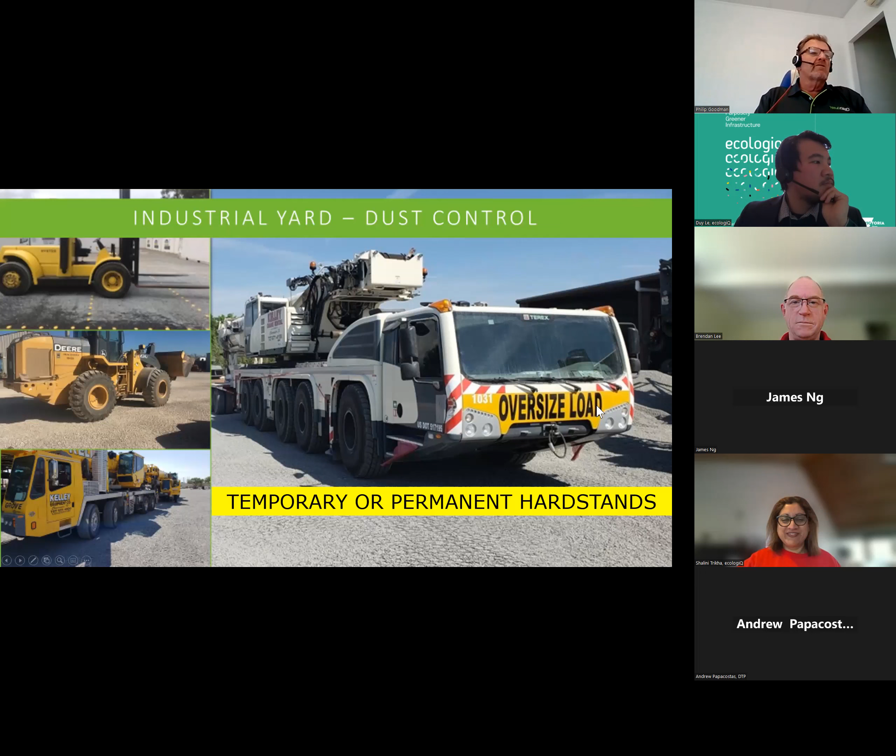As I said, it can carry any load, temporary or permanent hard stands. The aim is that you drive on the plastic surface, not on the gravel, so there is no dust created, no water ponding created, and the site becomes virtually maintenance free.

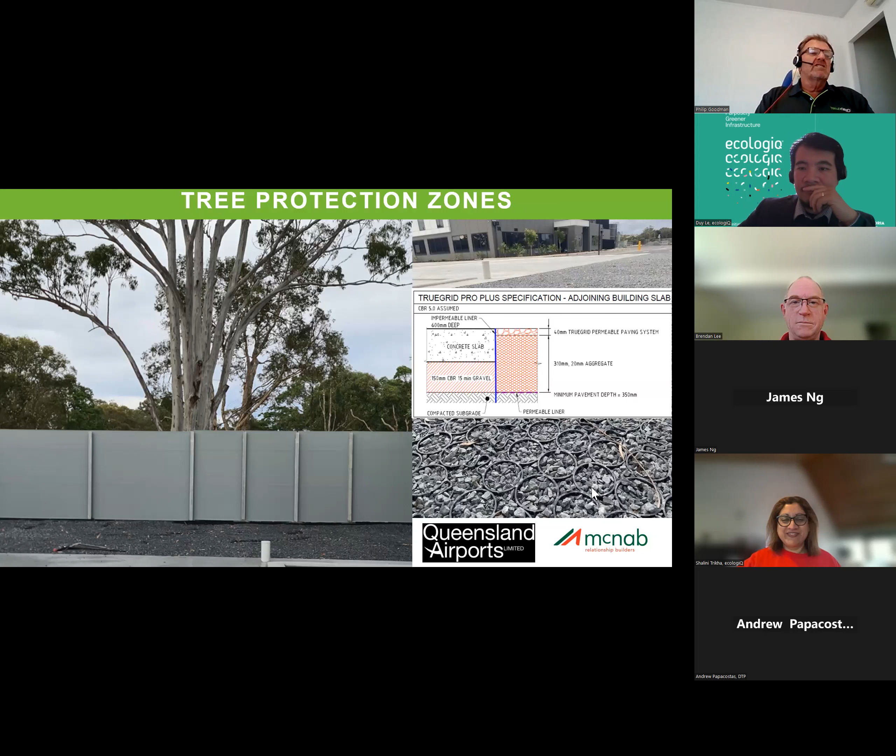Tree protection zones, we do quite a number of these. This particular project at Queensland Airports and McNab is for a food industrial warehouse. You can see by the cross section that the concrete slab, which is 200 mil thick, and the TrueGrid, which is 48 mil thick, carry exactly the same load. In this case, they used the permeable area to feed water into the tree on the neighbouring site, allowing them to have 100% land utilisation. The same vehicles drive over this surface, including semi-trailers and trucks.

This project, some of you will be familiar with, the Avalon Beach boat ramp upgrade for Better Boating Victoria. I've added the picture on the left because that is the grid being laid at this time. The reason for this particular project was that it had to sit right next to the ocean, had protected vegetation all around it, and sat on the salt flats. So how do you construct a treatment basin? The way you do it here is you capture all of the water inside the car park itself, and you treat the water prior to it leaving the car park into the vegetation or the ocean.

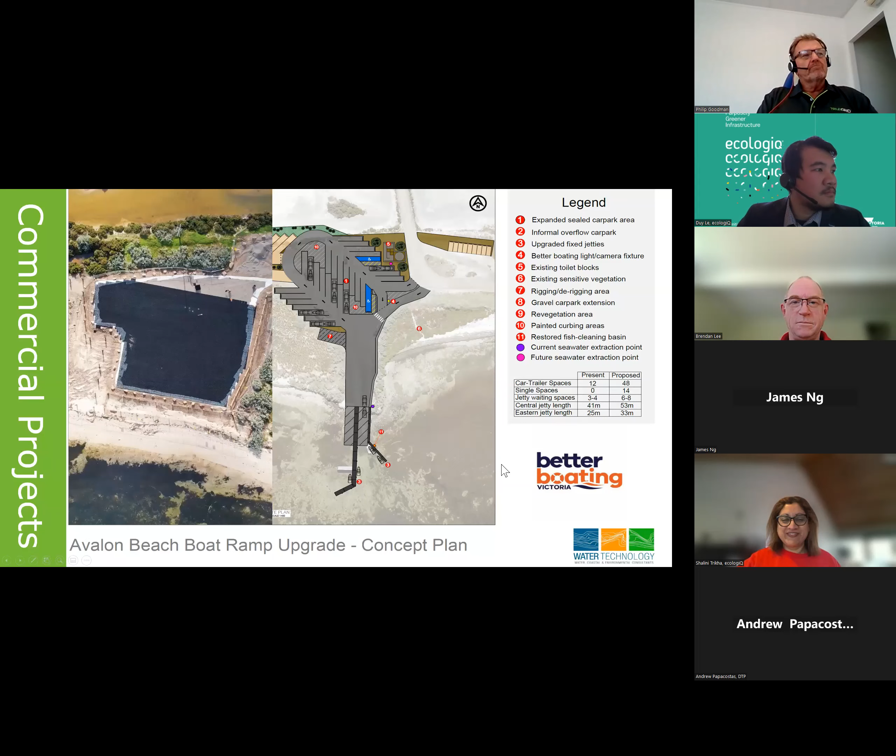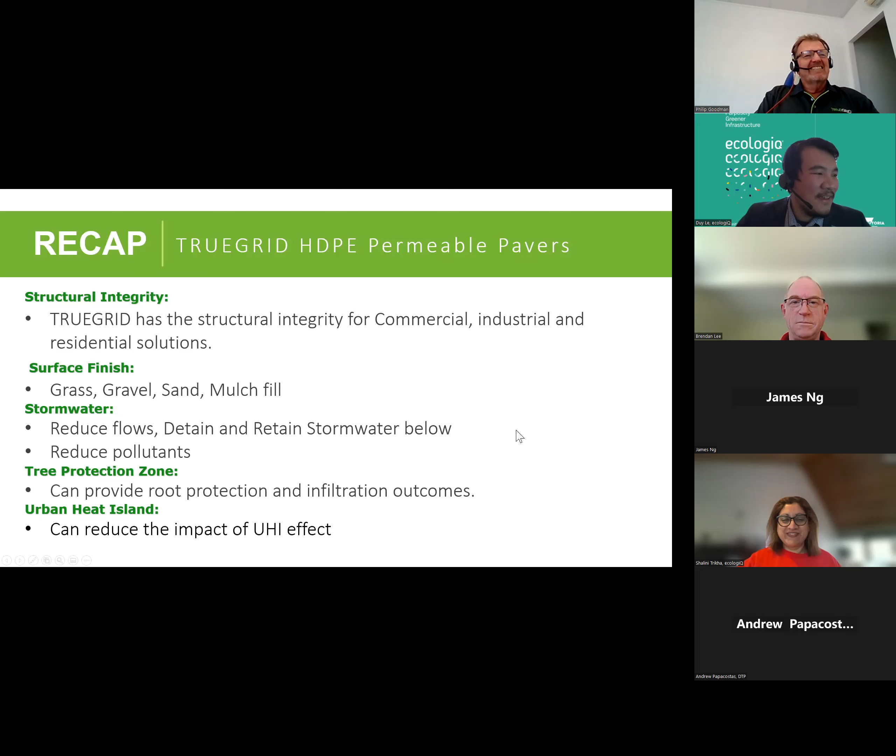So that's me. Really, the question I'm here to ask, like everything, is how do you obtain trials? How do you obtain projects where there are no Australian standards related to permeable pavers, whether brick, concrete, or otherwise, and there is no regulation for this type of product, where in actual fact we're not considered a pavement.

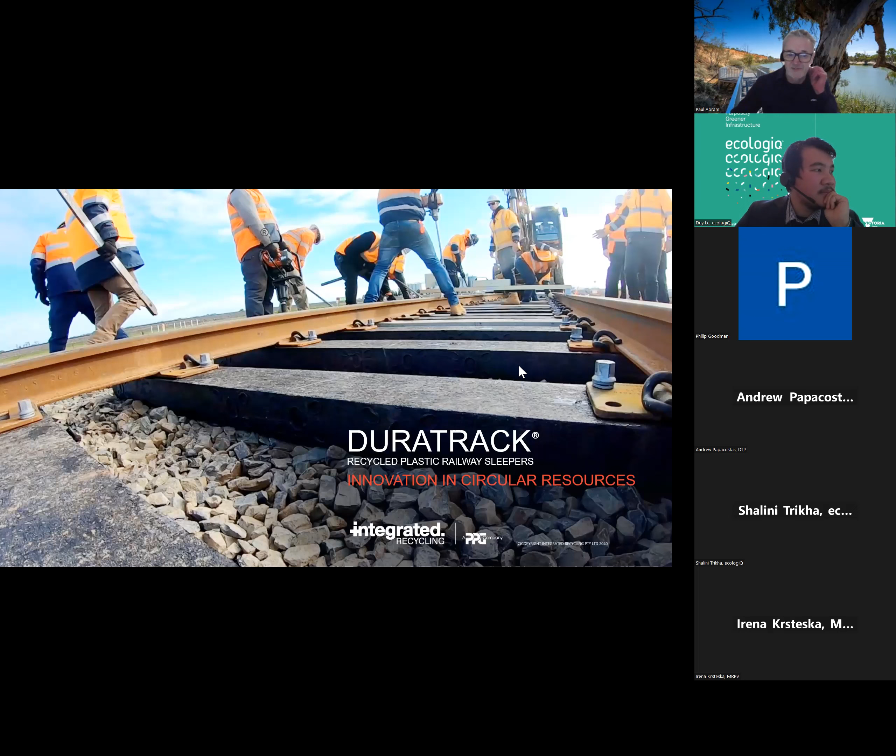I'm the sales manager at Integrated Recycling. I'm just here to give an overview of what it is that we do and the products that we provide. So it's relatively formal, so I don't miss anything. Duy, if we could go to the next slide, please.

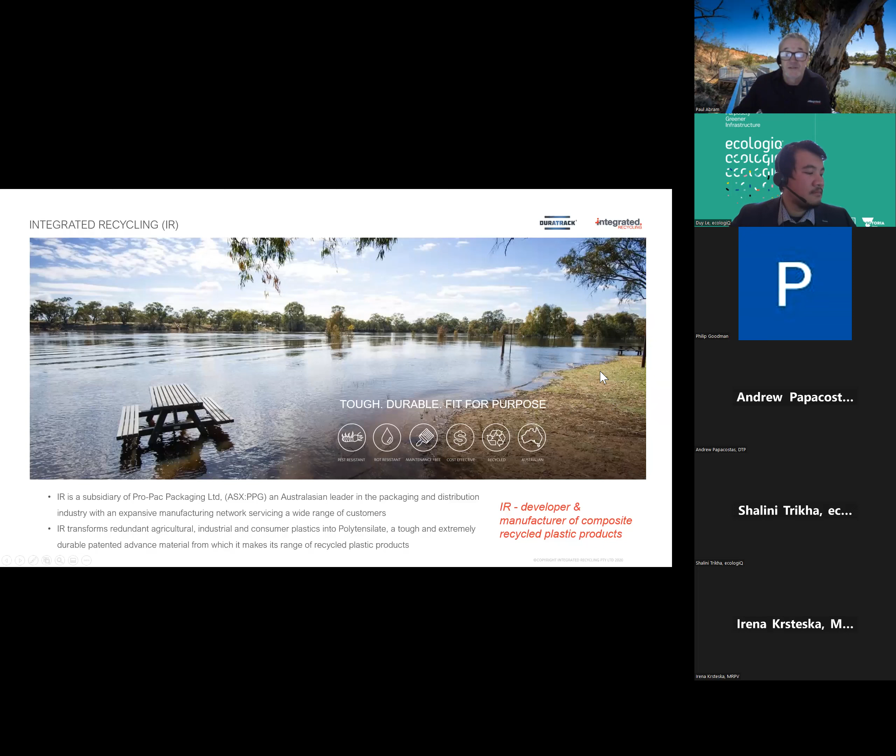At Integrated Recycling, we take redundant Australian agricultural, industrial and consumer plastics and produce a range of products that are tough and durable, aimed primarily at outdoor applications. Over the years we've progressed from servicing your local council with our Parkscape products to developing engineered infrastructure products for the transport sector. Integrated Recycling is part of the Pro-Pac Packaging Group, a leading manufacturer of plastic film products, and it's many of these products that we repurpose once they have come to the end of their service life. Our aim is to bring what was considered formerly redundant waste plastic into the circular economy to be treated more as a resource.

Next slide, please, Doy. So polytensilate is the name of the material which we make all our products from. We develop polytensilate so we can engineer products of scale for industrial and infrastructure applications. Australian recycled plastic makes up approximately 85% of the polytensilate mix. We believe this innovative and resilient material is now part of the solution to Australia's waste plastic problem. The high performance and versatility of polytensilate allows us to address a wide range of product applications in infrastructure, construction and landscaping. It won't degrade in the environment from rot, pests or sun damage, giving it great longevity in the harshest of conditions.

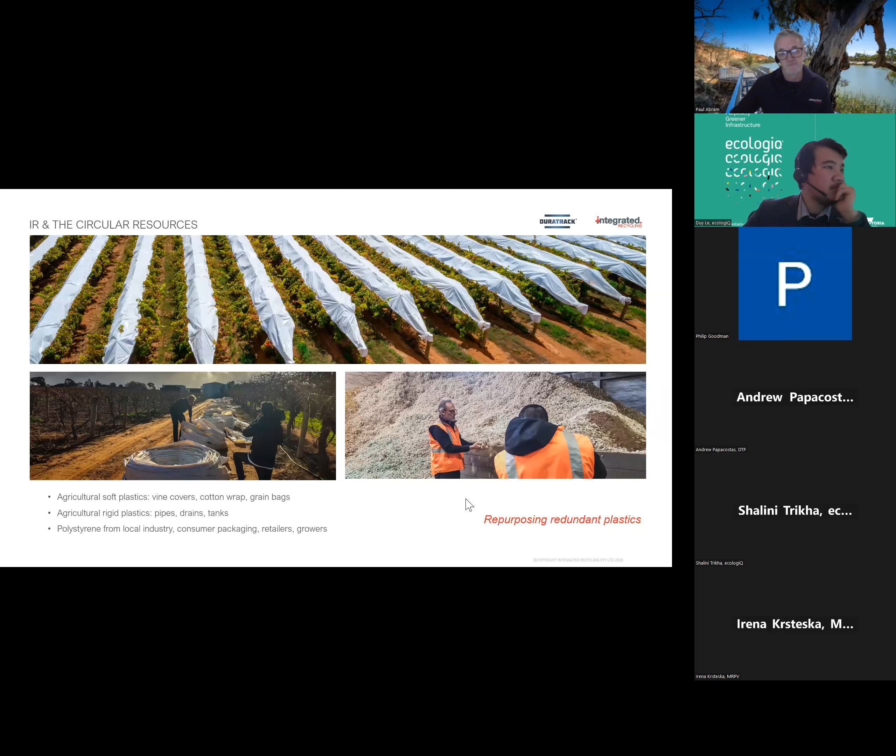From that local Mildura area, we also process other polyethylene-based plastics like irrigation pipe, water tanks, grain bags. We also use polystyrene in our polytensilate mix. While the majority of plastic is sourced locally, we are now being offered clean, high-grade plastics from further afield, with plenty of companies who are willing to deliver their waste plastic directly to us in Mildura, which is pretty amazing considering the cost to transport this stuff. But the sustainability aspect of what we do, people want to be part of that.

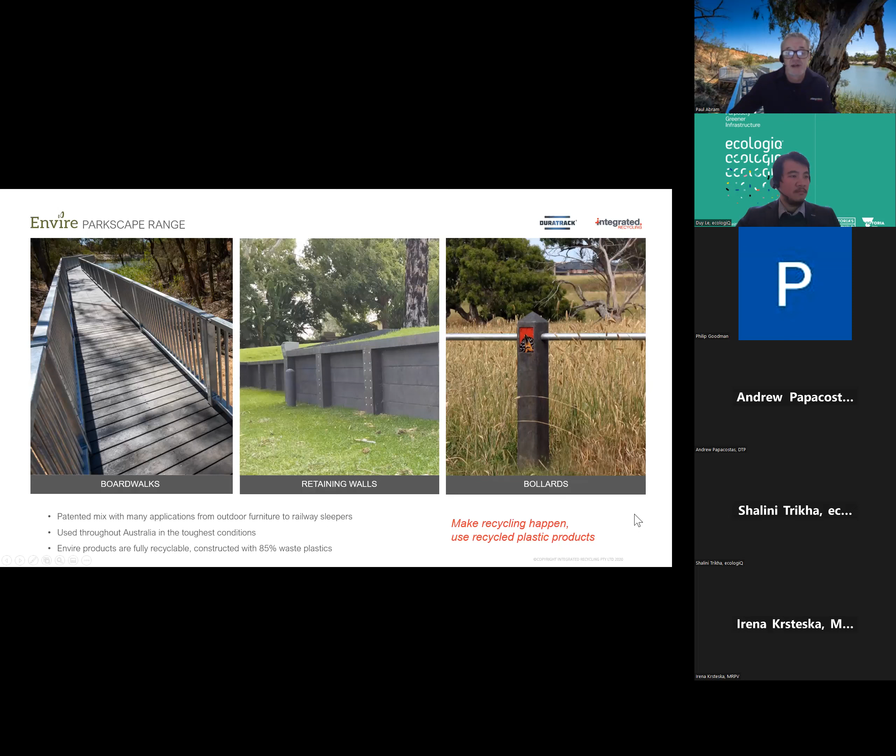Next slide, please, Doy. So the Parkscape range, this is where our story really began. We've been supplying our furniture and bollard products to customers like Parks Victoria since about 2010. As our Parkscape range grew, our products proved to be a great investment due to their longevity and the fact that they barely need maintenance. They easily outlast traditional timber materials, and they're ideal for national parks and more remote locations where regular maintenance and inspection is difficult. The Parkscape range now includes a wide range of customizable bollards, boardwalks, and a retaining sleeper system, backed by engineering and testing carried out by the University of Melbourne. Now that there's a greater emphasis on sustainability in most projects, these tough and durable products provide both a long service life and those sustainability credentials.

Next slide, please, Doy. So we have a noise barrier wall, which we developed in conjunction with the geotechnical engineering team at the University of Melbourne to test the modified polytensilate formulation as a structurally sound and lightweight panel that inhibits the transmission of sound waves.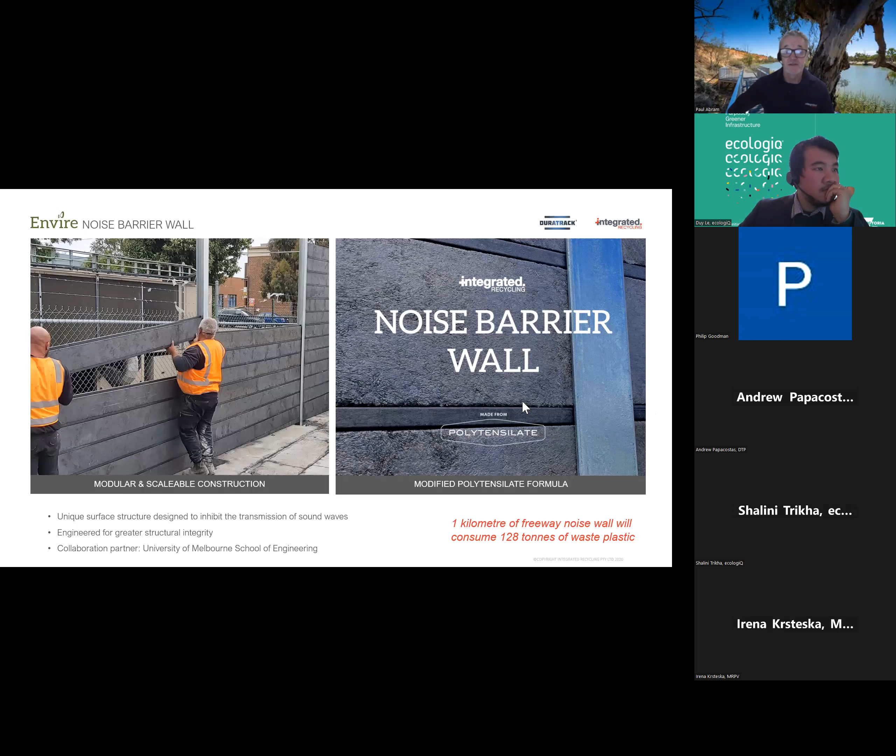So the DuraTrack sleeper is one of our favourite products. The development of a recycled plastic rail sleeper was initiated by Public Transport Victoria in 2014, and we modified our formulation to meet the performance requirements of the rail industry. During that development, I collaborated extensively with the Institute of Railway Technology at Monash, and for that matter still do, for testing and analysis. In 2021, the DuraTrack sleeper was type approved for slow speed applications by both V-Line and Metro Trains Melbourne, and we have ongoing in-track type approval trials with Queensland Rail and with ARTC.

Over the past 12 months, approximately 1,500 broad gauge DuraTrack sleepers have been installed on several V-Line regional rail revival projects in Victoria.

DuraTrack railway sleepers deliver a closed loop recycling solution. The load bearing capabilities of this product have worked really well with the application, and we use between 64 and 99 tonnes of recycled plastic per kilometre of track installed. DuraTrack sleepers are easily recyclable at the end of their service life, as they don't contain glass fibre or steel reinforcing. So at the end of their service life, they can be reprocessed into another sustainable project.

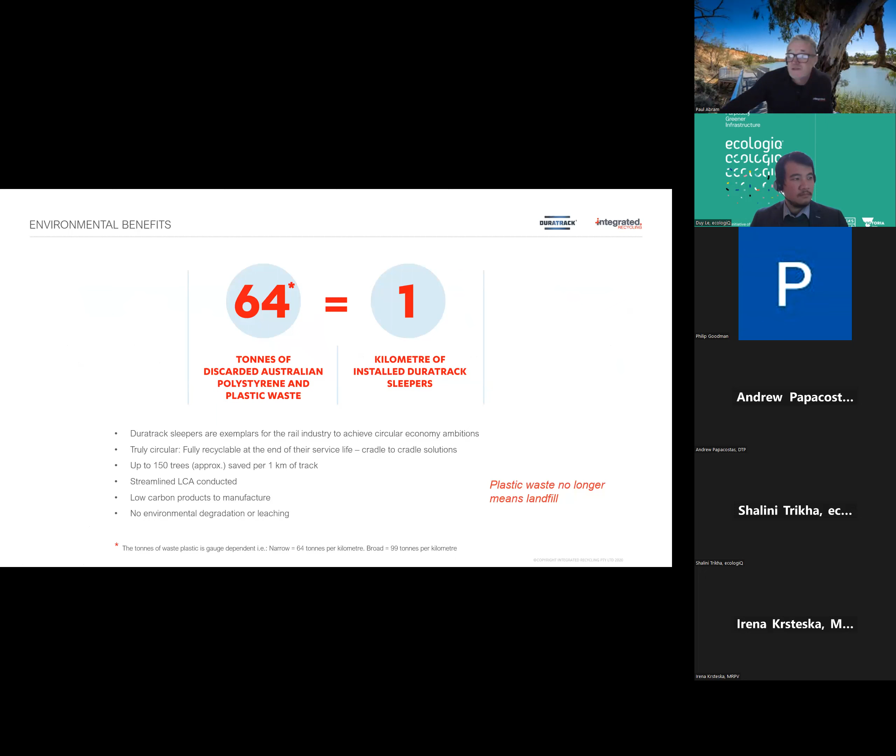A few final statistics: a kilometre of rail using DuraTrack sleepers would use at least 64 tonnes of waste plastic and would save approximately 150 trees. And for the noise wall barrier, a 250 metre long noise wall barrier at 3 metres high would use approximately 40 tonnes of waste plastic. So it's something to think about.

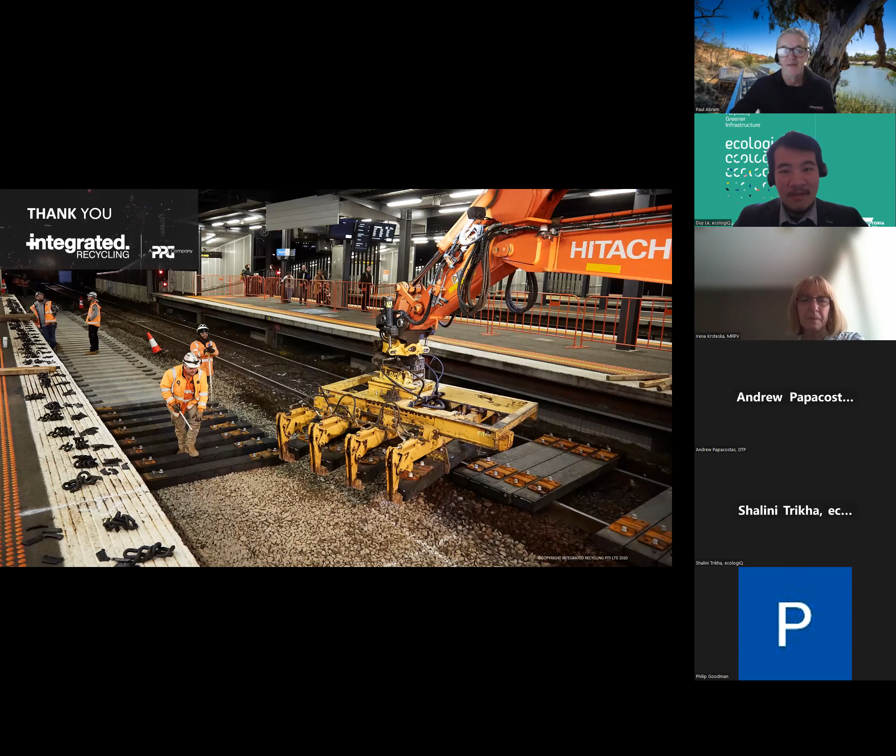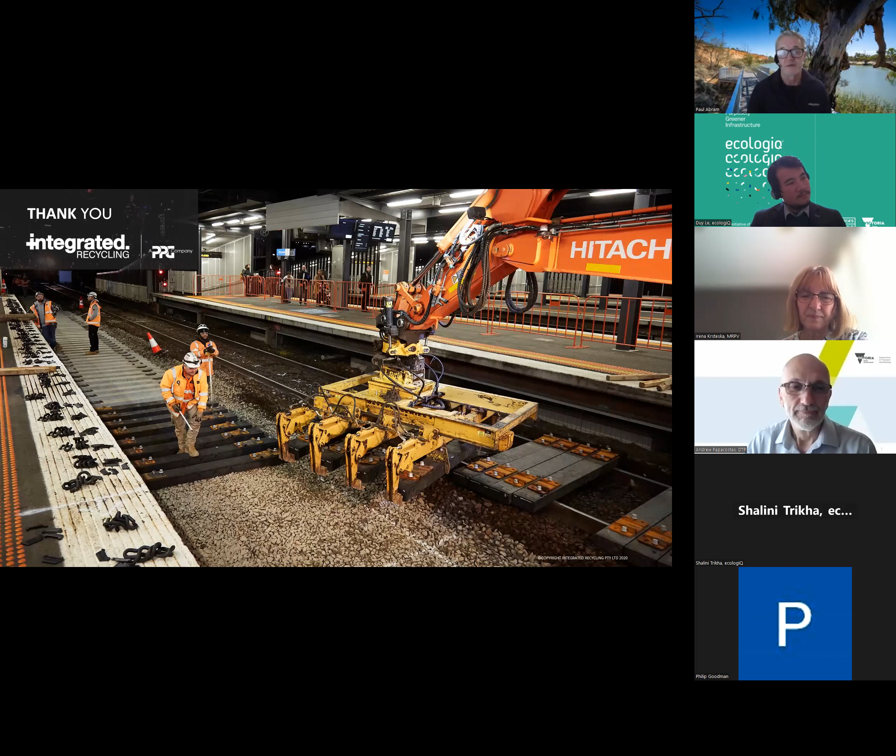I don't know if I missed that, but what sort of percentage of recycled material would the products have, and might it be different for the DuraTrack versus the noise wall? No, it's actually pretty much all the same - it's generally 85% approximately recycled plastic content. The difference between the DuraTrack and the Parkscope products is we have a higher content of high density polyethylene, so a higher HDPE content. That's the main difference between the two, but the full range is about 85% recycled plastic.

And another question - not sure if you're familiar with the specification for noise walls that was developed, and how the product would comply with that. Did you test it against that? Yes, we did. We received the noise wall specification that was done by VicRoads, released a couple of years ago. We worked on that and can provide a tick box going through each layer of the specification and how our retaining wall sleepers perform against it. Generally we tick most of the boxes, so we built our product around that specification.

And I assume the noise wall panels are also fully recyclable at end of life? Yes, that's correct. Okay, that's all from me. Thank you.

Thanks Paul for the presentation, and well done on developing such a product range and technology. That photo on screen, I think it's Richmond Station with Duratrack. Yep. So leading up to that application, you would have done a lot of lab type testing to demonstrate to the client it will go the distance. I think that was installed some years ago. Yep.